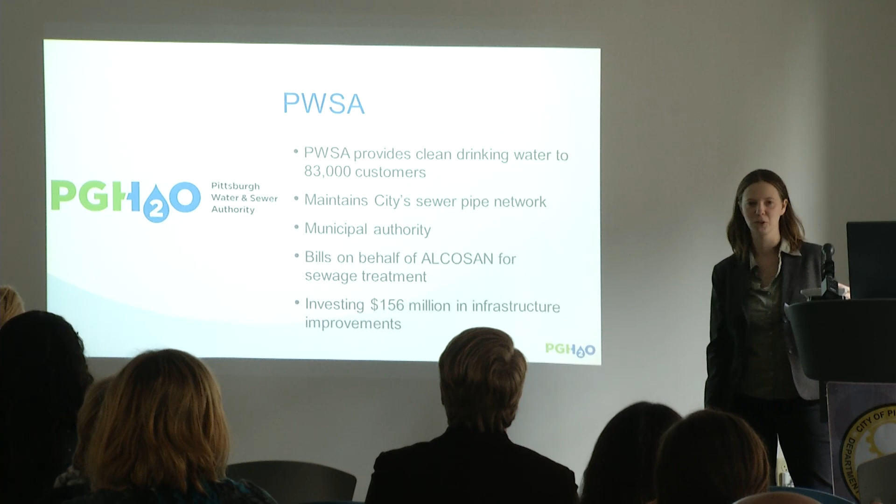On the PWSA water bills, you'll also see a sewage treatment charge, and that's coming from Alcosan. We're also invested in infrastructure improvement, which, along with many other cities, Pittsburgh needs.

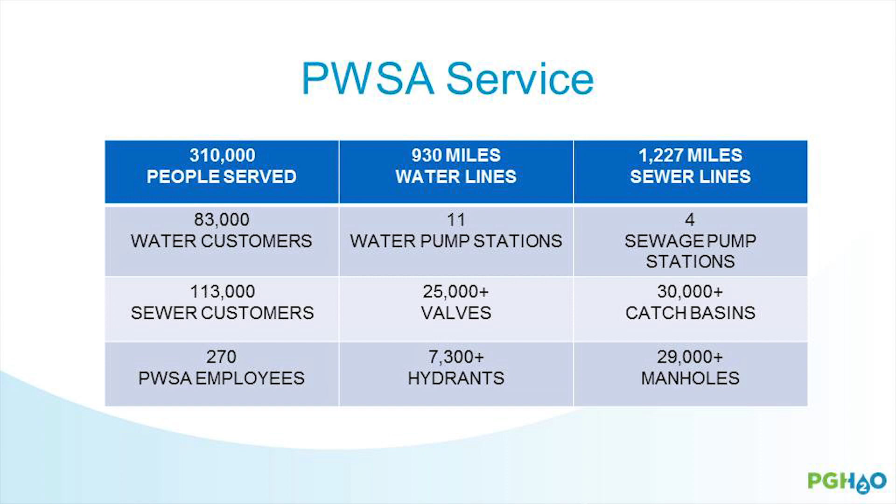So a few stats on our water production: 70 million gallons a day, with a capacity of 120 million gallons a day. A more significant storage capacity means that we're pretty well covered in case of emergencies. Lots of pump stations, a lot of catch basins, a lot of fire hydrants. It's a pretty big system, and it's an old system, and it requires a lot of maintenance.

So just to clarify, PWSA is not Alcosan. Sometimes people get confused, but the Allegheny County Sanitary Authority is the wastewater treatment plant in the region and serves 83 communities, including the city, and they discharge the treated sewage into the Ohio River. So there's a coming and going of water for drinking and returning of treated wastewater to the river all along, and that happens in many rivers. So PWSA is one of Alcosan's customers, and I'd be happy to answer more questions about that.

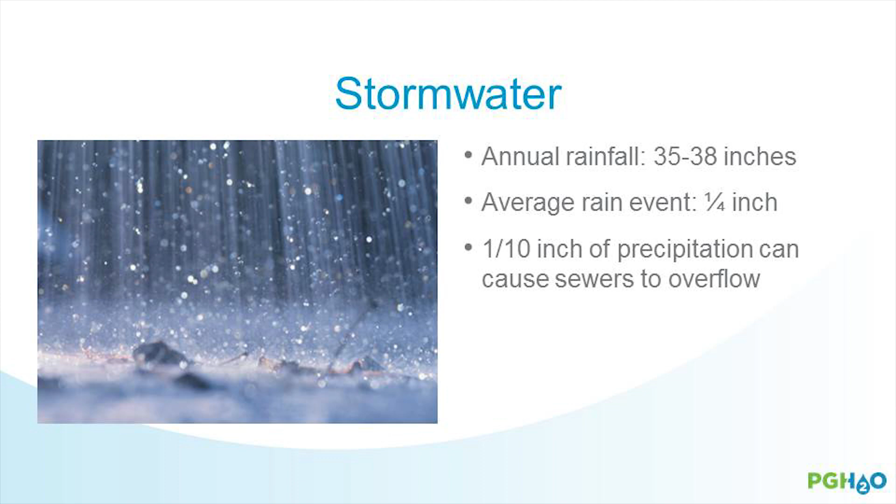But the next topic is basically why stormwater is an issue for PWSA, because generally PWSA has been known for dealing with things below ground. Once it enters the catch basin, once it's in the sewer pipe, then PWSA deals with it until it gets to Alcosan. But why are we talking so much about stormwater? We have a lot of rain in this region, and when we have rain, we have an overflow of the sewer system. We've got a diagram of that, I'll get to that in a second.

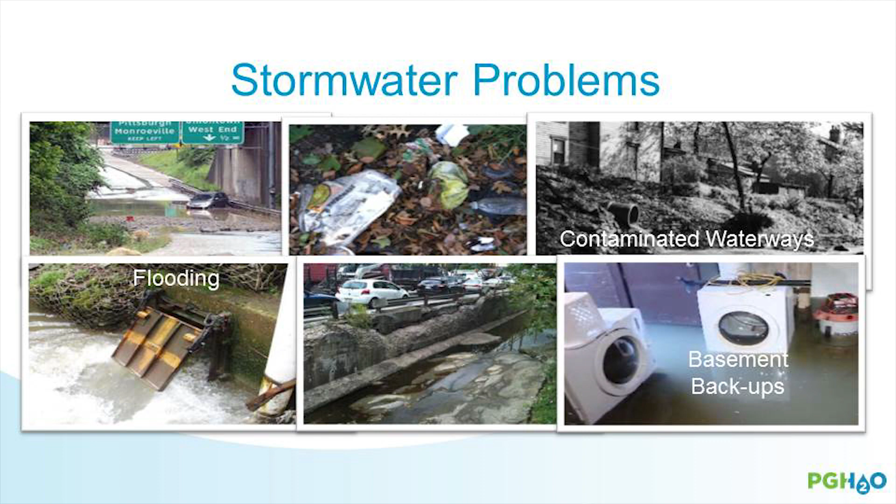Stormwater runoff is basically when we have a surface that's impervious, that's paved. The stormwater will have to go over it somehow to get to the catch basin, to get to the sewer system. This can cause some issues - this can cause flooding, this can cause contamination in our waterways, and occasionally we have basement backups.

But here's sort of the issue that we're most focused on: the sewer overflow. The way the system was designed is that sewage normally comes from residential and commercial properties, anywhere there's sewage, into the sewer system, and that's enough - there's enough capacity at the treatment plant to handle that volume in dry weather. But when it rains, the stormwater adds to that in those combined sewers, and they overflow.

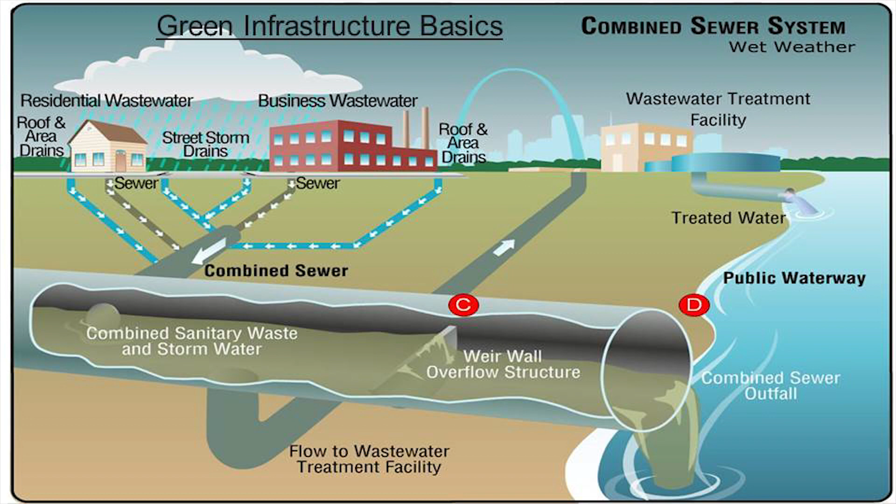And you can see this - these slides come from St. Louis, you can see the arch. So we're not the only city with this issue, they just happen to have a nice graphic depiction of it. But this is the issue that we've been trying to deal with for many years.

So why green infrastructure? Green infrastructure is the idea of mimicking nature by absorbing the rainwater, or at least managing it for a while until that storm has passed and there's more capacity in the system. So the idea is letting it soak into the ground, and you can have all kinds of technology to do that.

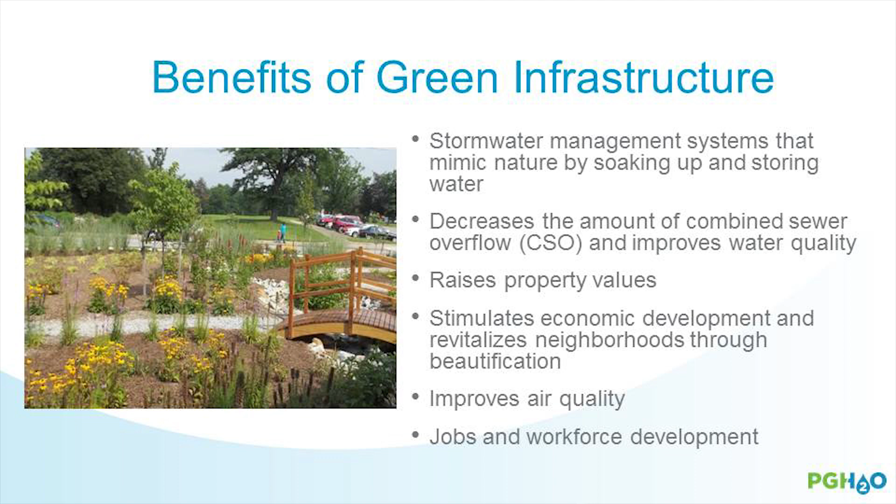But the benefits: you're using plants, you're using trees, and that's going to have other benefits like raising property values. It's going to beautify your neighborhood. Those trees and plants will improve air quality. There are jobs associated with installing and maintaining those green infrastructure project sites. And that's why we are talking about this.

That's why we want to do this wherever we can to manage stormwater, as opposed to building pipes and tunnels and that sort of thing, which we may also need to do in order to reach the water quality standards that we're trying to get to.

So these are just some examples. A rain garden is basically a depression in the ground, like a bowl. That allows water to stay there for a while, just long enough to infiltrate into the ground. Whereas if it's a slope and not a bowl, it's just going to run off into the sewer system. Even your lawn can be pretty compacted and not have that absorptive capacity.

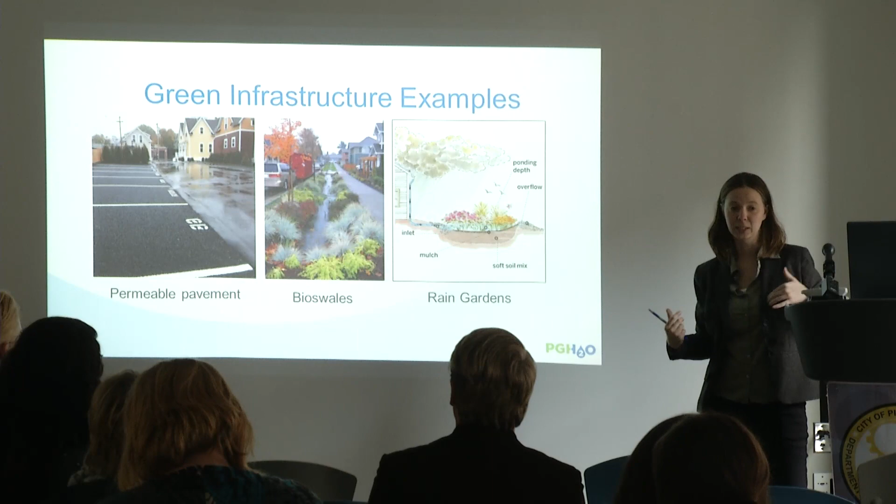Permeable pavement allows water to soak through. You can store it underneath until you can slowly trickle it back into the system or infiltrate into the ground. Street trees are a great resource. You can design a tree pit in such a way that it accommodates a lot more stormwater than a typical tree pit, so that's an opportunity.

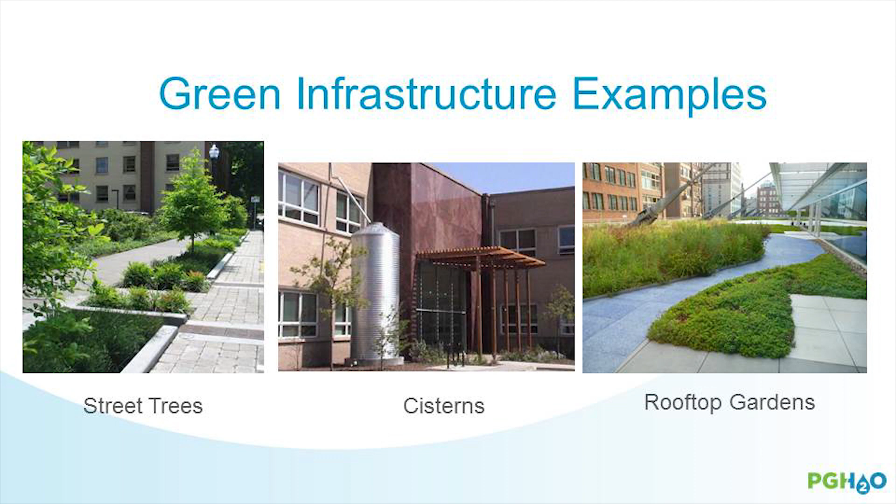Cisterns are just a way to capture rain. A rain barrel is a small version, a cistern is a big version, same concept, so you can reuse that water when it's dry again. A rooftop garden or green roof is another opportunity. Wetlands can be used to treat stormwater, and you can put trees in your backyard, or have a planter box. So you can get creative. These are opportunities to combine landscape and infrastructure, and there's a lot of ways of doing that.

So what's the reason why we started talking about this? The Department of Environmental Protection and the County Health Department required PWSA to deal with this issue, and the city. So PWSA and the city are joint parties to this consent order and agreement coming from these regulators. Not just Pittsburgh, but all the municipalities in the region had to address this issue.

We were required to submit a wet weather feasibility study, which we did in 2013. And while all the municipalities who were doing that had a gray plan, basically tunnels and storage tanks, we also saw at PWSA that there was an opportunity to test out green infrastructure and see how much stormwater it could manage and how much of an impact it could make on the issue.

So we worked that into our wet weather feasibility study as an adaptive management plan. We're going to try out green infrastructure, and we're going to see how much it can do. We're going to measure it. We're going to monitor it.

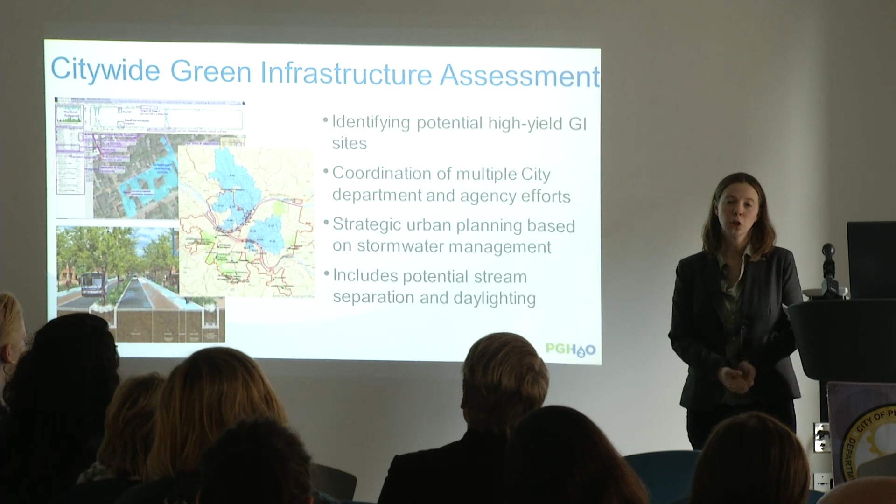So what are we doing now? We are now involved in a study that will tell us where in the city are the most cost-effective places to put green infrastructure. So we're using a lot of technology to do that. We're using modeling software that tells us where the raindrops fall, and we're also focusing on priority sewer sheds.

So we have focused on the ones that have the most sewer overflow, or also some of the smaller ones where we think we might be able to remove the need for a gray solution. We're also looking at stream daylighting, because sometimes streams end up in the sewer system and then we have to treat that water.

Why should we have to treat a stream like that? So we want to integrate that with urban planning.

Here's an example of what another city has done. This is Portland, Oregon - a stormwater management infrastructure site that happens to be an amenity for some of the nicest places to live in Portland. So this is the kind of strategy that we may be able to implement in the coming years.

Another thing we're doing is working with neighboring municipalities, because water droplets don't care whether you are in Pittsburgh or Dormont - that doesn't matter to them. So we've picked the Saw Mill Run watershed as our demonstration for an integrated watershed management strategy.

This is an EPA-approved way to address water quality standards. There are 12 municipalities in this watershed, and they each have regulations they have to meet to have clean water. So it makes sense for us all to work together and figure out what's cost effective for the whole watershed, because that's how the stormwater flows.

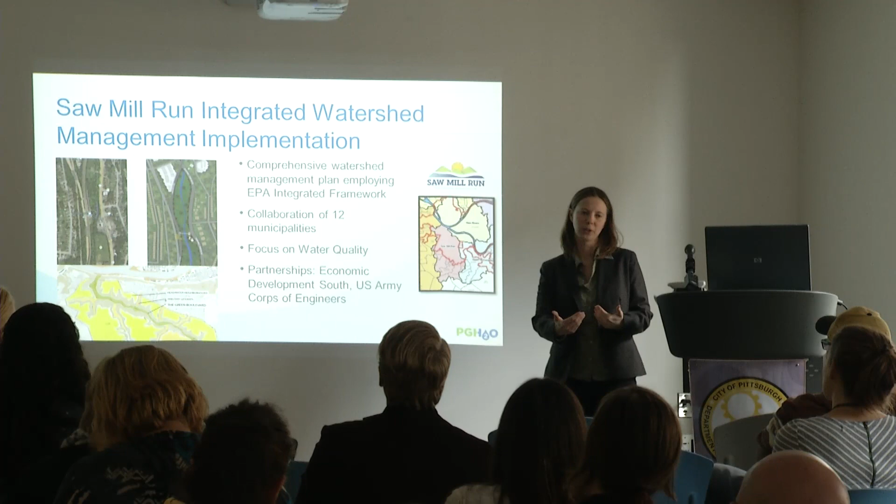So we partnered with Economic Development South. They're a community development organization in that part of the county. The Army Corps of Engineers has gotten involved, and we have a lot of momentum there. We're doing water quality sampling in the next month or so, which will give us data that tells us where to go next in that watershed. So that's an exciting project.

Another exciting project is a grant program we recently developed. We had $250,000, which we awarded to 17 projects throughout the city. Once implemented, these projects will manage somewhere between 3.5 and 4 million gallons of water per year. So we think that's a pretty good impact for our investment.

Those are mini grants that go to community groups and nonprofits, as well as matching grants going to property owners who are doing more large-scale, significant stormwater management. I'd be happy to answer more questions about that.

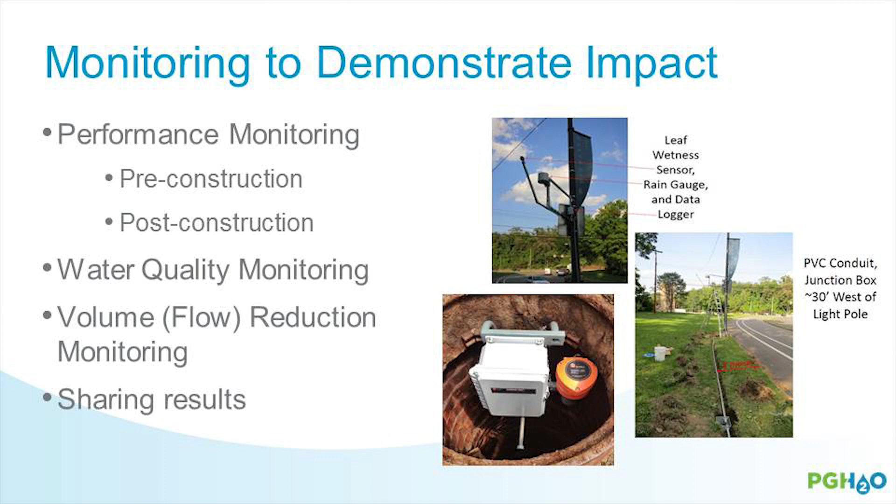As we're doing a lot of green infrastructure, we want to be measuring it and making sure it's having the impact we expect, so we can go back to the regulators and say, now that we know what impact it's going to have, we can use that to modify our plan for addressing sewer overflows and meeting water quality standards. So monitoring is a big component of everything we're doing.

Hi, I'm the communications manager for the PWSA, and I'm just going to pop in and interrupt for a minute to talk about this program.

This got kicked off at the end of March this year. As Katherine was discussing, we had this consent order and agreement, and one of the things we had to manage was some communities, particularly in the southern area of Pittsburgh, where approximately 4,000 are failing a dye test required by this consent order.

The dye test means if you're one of these homeowners who fails it, when you go to sell your house, you can't, unless you make this modification, which requires separating your stormwater and your sewage. This process can be extremely costly. The boundary between where PWSA takes responsibility and the homeowners is typically about the curb, so this is a homeowner responsibility.

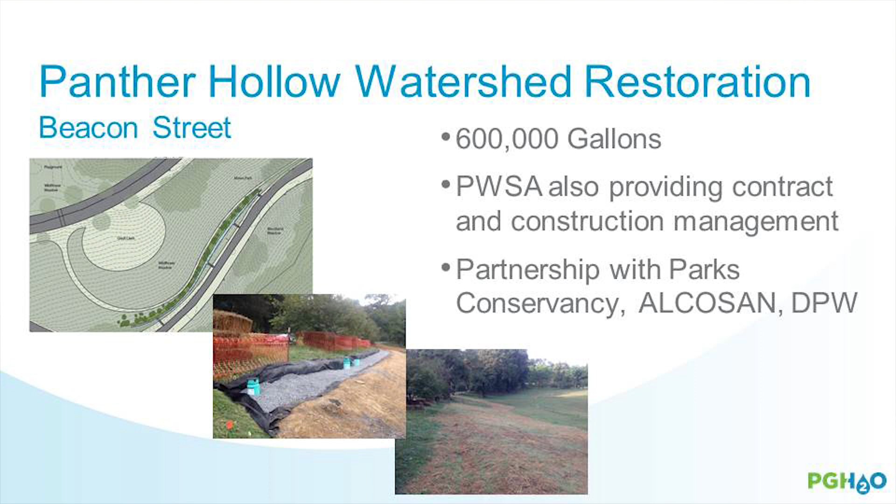A meadow with all its plants is going to absorb more stormwater than a lawn, slowing down that water as it comes down the hill. There are also devices called level spreaders that accept the water and spread it out along the hill so it absorbs more efficiently.

Another portion of that project is the golf course, where, as I mentioned, lawn can be pretty compacted, especially a golf course lawn. So putting berms or bumps in the landscape to slow that water down is what's happening here. This helps downstream where Carnegie Mellon was having flooding issues during rainstorms. The idea is to keep that water on the golf course where it falls.

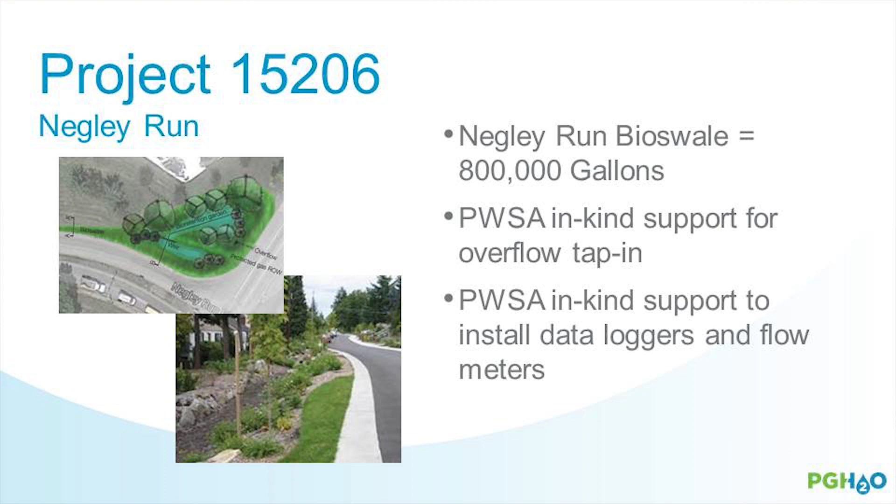In the 15206 zip code, Project 15206 did several projects. One is in Negley Run, where they have a rain garden at the corner of Negley Run Boulevard and Washington Boulevard. PWSA was involved in supporting that project and supporting monitoring there.

Another project that hasn't happened yet is in Larimer, where the idea is to do curb bump outs, or curb extensions, so that it's part of the streetscape and absorbs stormwater as well.

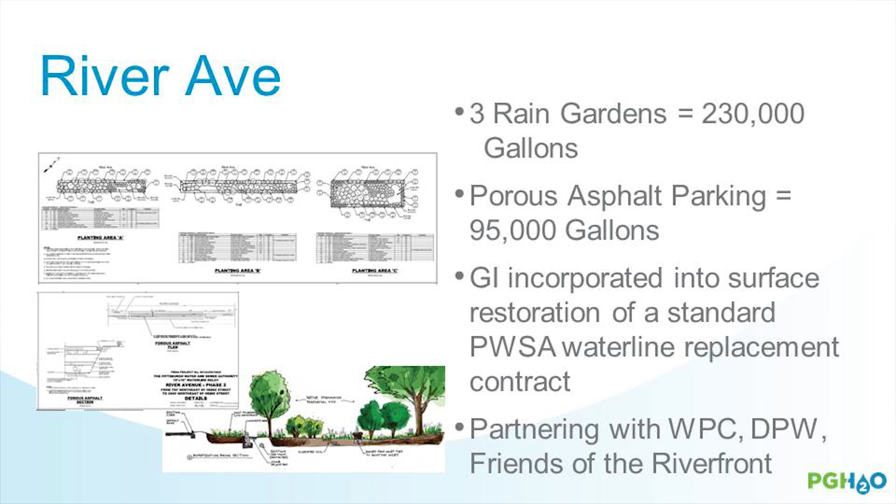On River Avenue, PWSA was doing a waterline project, and we took advantage of the fact that there would be a lot of space dug up and thought, let's put back some rain gardens, some bioswales, and a porous asphalt parking lot. We worked closely with Public Works on determining how to do that, and the Friends of the Riverfront agreed to help maintain the plants going into that.

At our treatment plant, we tried to demonstrate right in front of our building what this is like. We had a traffic island with a raised area in the center that just had one lonely tree. Our crews dug out the middle to make a big depression area like we were talking about.

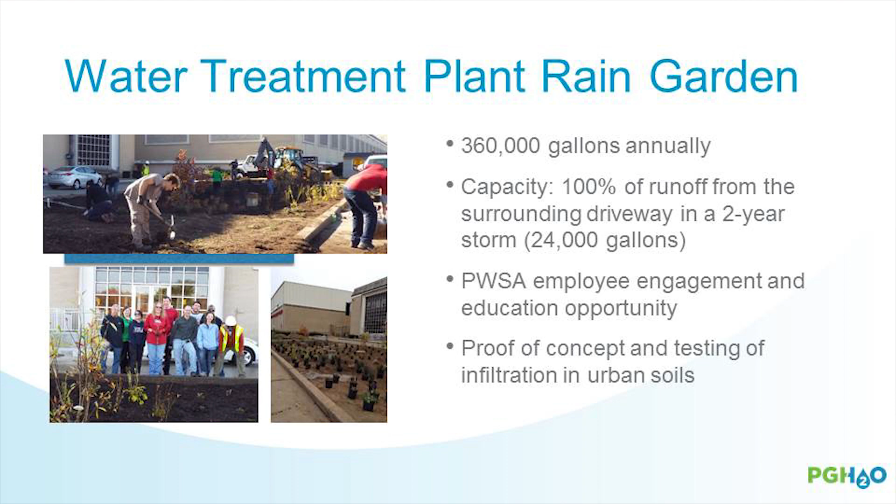We had our staff come out and do the planting. Everyone really enjoyed getting their fingers dirty—these are folks who normally sit at a computer screen. This is what it's looking like this month. Not only is it an improvement in terms of aesthetics, at least I think so, it's also going to manage the stormwater that falls along this entire long driveway up to this trench drain, coming down and all around where there are curb cuts entering in there.

So it's a really exciting project, I think. Basically, what we're talking about is using stormwater as an asset, rather than trying to send it away as quickly as possible down a pipe. As you know, we have a lot of wildlife on our rivers from time to time, so this is important. We want to make sure our rivers are usable every day and not polluted. So that's really what this is about.

So should I take questions now? Yeah, all right, we're taping, so if you guys have a question, make sure you speak into the mic if it will come off. Do you have a separate one? Oh, I see. Do we have any questions?

Just a quick question about the dye test: where do they put the dye, and what's the process of that?

So the dye test actually takes place in your home, and to do it you need to hire a plumber. There are tips on our website about how to identify someone who's a licensed plumber to do that process for you. Then the plumber gets a report, and we process the dye test. You're basically looking for it to go in your home and looking for the remnants of the dye outside.

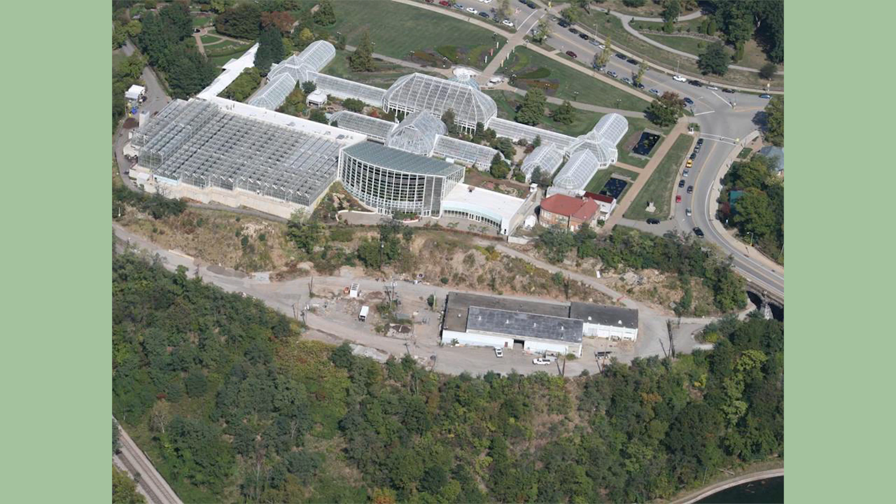So the Phase 3A was our project, the Center for Sustainable Landscapes. Really the idea of this project embraced the Living Building Challenge, which requires us to keep all of our sanitary waste, all of our sewage waste on site and treated, and also all of our stormwater. So none of the water from this lower 2.5 acre site reaches the pipe to PWSA and down the hill, down into the hollow and further on to Alcosan.

So the building was completed at the end of 2012. It's a 24,000 square foot two-story building. It's our administrative offices, our children's programming and education and research.

Some of the goals of the project, I mentioned the Living Building Challenge - we were awarded that in 2015, beginning of this year. We also achieved LEED, the Sites Initiative, which is kind of LEED for landscapes, also the Well Building Standard, and the facility is a net zero energy facility, so we generate more on site with renewables than the building uses. We've also been able to quantify the amount of stormwater that we've saved that hasn't impacted the city's infrastructure at 3 million gallons a year, based on taking that stormwater, getting it back into the ground, or reusing it in the building.

So when we started planning this project, we were looking at the nature of what nature did with stormwater before we started building on it or developing it.

Again, water that falls from the sky, some of it gets infiltrated, some gets used by the trees and plants, some settles in ponds and lagoons, and a lot of it evaporates, which we're seeing a lot on our campus in our lagoon over the hot couple weeks we had a few weeks back.

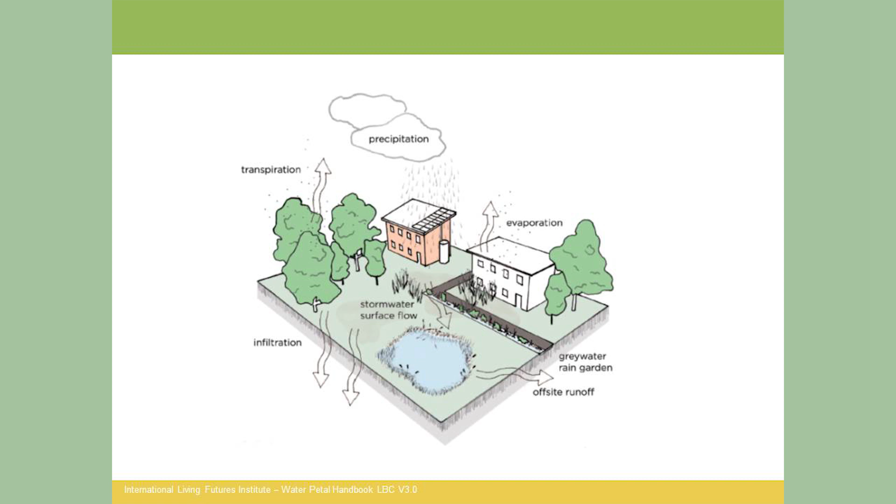So we're building on this land, and now water's running off of our roofs and we're trying to push it off. If we're in the city where there's not a lot of places to infiltrate, it connects to the city's infrastructure in certain areas where we can leverage the amount of pervious areas. We're trying to push that water and get it back into the ground, to achieve stormwater management, keeping the surge of storms out of the infrastructure so we don't have combined sewer overflows.

Some of the different elements that help feed the function of stormwater management on our project, which Katherine talked about earlier, is pervious paving. Over our parking spots, we have pervious asphalt. It's not really compacted very well, so there are still voids in it that let water find its way back into the ground. We typically have gravel underneath, allowing water to settle in and slowly perk into the surface. Around Pittsburgh, we have relatively clay soils, which are tough to perk through, so we're creating that space between the surface and the clay subbase to allow water to slowly perk into the ground.

Some of the other elements we're using are rain gardens. We talked about rain gardens, bioswales, and bioretention areas to allow that water to settle back into the ground.

An open water lagoon - we talked about stormwater as an asset. This is a huge asset for us in our new outdoor gardens. We have an open water stormwater lagoon that's created a nice amenity for our visitors and a real interpretation of stormwater, with fish and turtles and other things living in the gardens now from the stormwater lagoon.

Really the first place water falls onto the site, we can take water from the tropical forest roof, a big glass roof, and it comes through a pipe and fills up a cistern, a 1,700 gallon cistern, where the water is stored and we can use it for toilet flushing, irrigation, or service water for the sidewalks. If this tank overflows, it finds its way into the lagoon.

The lagoon is a wetland with wetland plants, and a lot of the water will be used by the plants. There's an underground perforated pipe in the soil medium of the plants, so the water is pushed there and bubbles up through the plants, and the plant's roots help to clean that water.

All the water that falls on the site perks back into the ground, or if there's a large rain event, it finds its way into the lagoon. If the lagoon overflows, it finds its way to a large chamber underground with gravel and what are called AquaBlox - big plastic units with voids in them - so the water can rush in, stay there, and slowly perk back into the ground.

We have a valve where we can tap into some of the unlined tank, and a lot of the water from surfaces like the roadways finds its way into the rain garden. If the rain garden overflows, it finds its way into that unlined chamber underground where we can tap into that water. We've also built another lined cistern that taps to the upper campus.

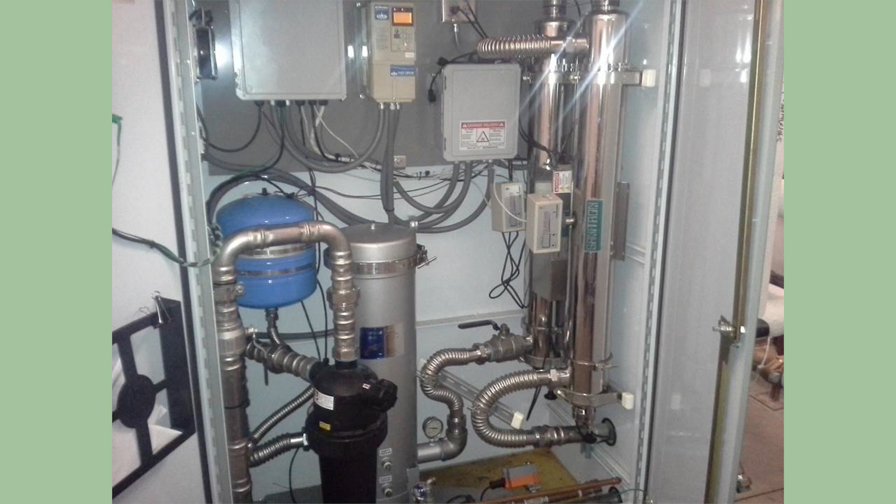So it's taking the stormwater, filtering it, and actually disinfecting it with UV lamps, and that's what you see here. We're treating it to a minimum level, some of the stormwater, based on the DEP standards for reuse water.

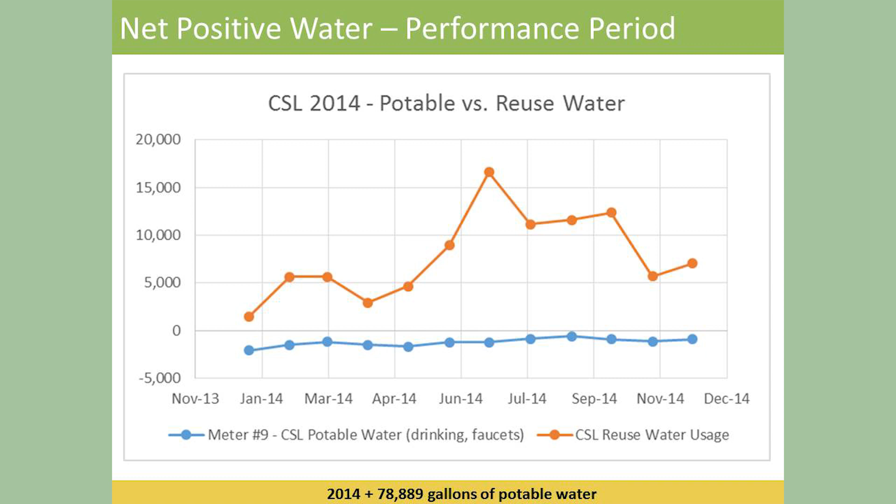So it's taking toilet water, running it through an on-site system. It's really interesting to see that - we have a relatively small building, but if you start to scale that up, 10% of the water is just for handwashing and drinking. The rest is just moving waste around. So it's interesting to think about that concept on a larger scale, what impact that could have or eliminate downstream into the infrastructure.

But again, we reuse about 80,000 gallons of what would be potable water, but it's reuse water. It's wastewater that we're using for the toilets, but that's specifically on the sanitary side.

Is there any water testing done, even though the cistern water is not used for drinking? But is there any basic testing though? Yep, we're required by our permit from the DEP to do quarterly testing.

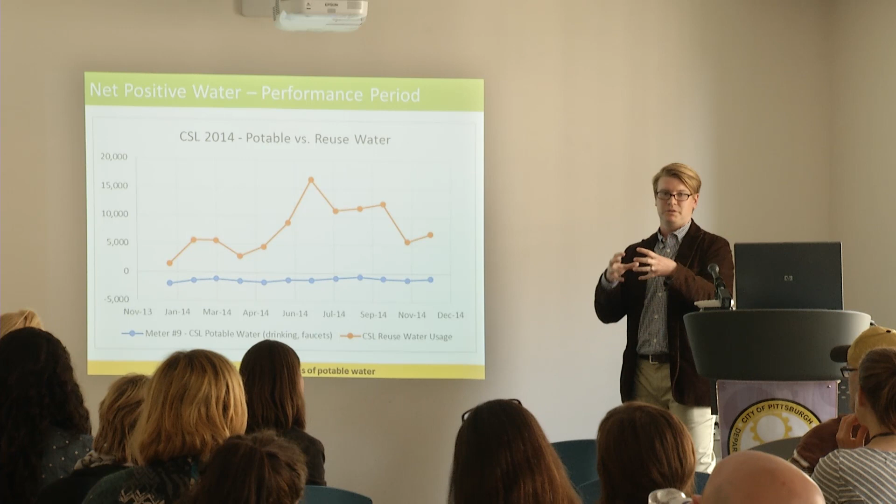So it's looking at things like fecal coliform, biological oxygen demand, the Class B standards for DEP. We do that on the stormwater, but also we're required to do it on the sanitary. We take raw sewage, treat it on site, and then put it back to the toilets. That's really where the testing comes into play for our sanitary system.

Just another thing to highlight, we talked about some of the green roofs, some of the different elements that we use. We have a green roof on the CSL, which not only helps hold back stormwater and get it back in the ground for use by the plants, but keeps the storm surge on the roof and not down into the city's infrastructure. We're monitoring this through performance, and I'll highlight those with a few graphs.

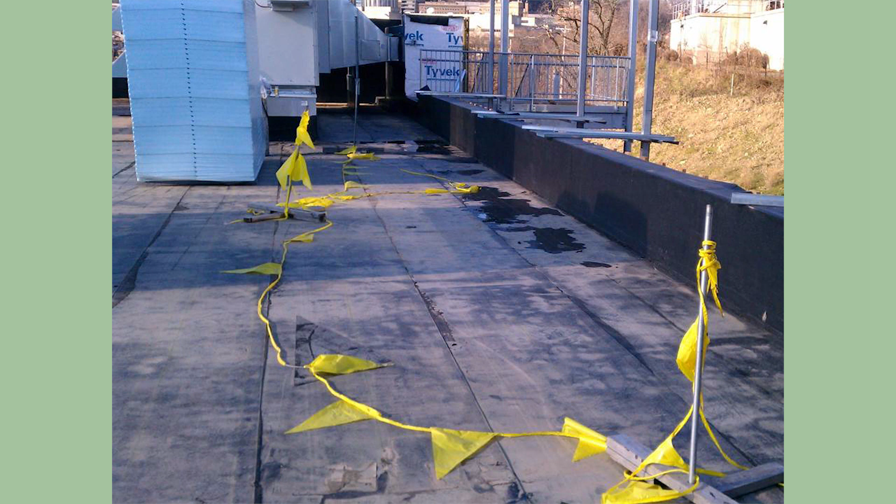So this is what the green roof looked like when it was being built - a waterproof membrane, you can see the insulation going up. This is the drainage board before we put the planting medium down. This is the guys putting the soil medium down, and then we planted the roof afterwards.

So a nice amenity - we talked about stormwater elements as being an amenity. This is part of the paid experience to go to Phipps, to check out some of the plants on the roof and experience some of the views on the lower portion of our campus. And this is what it looked like earlier this summer - kind of blends in with the landscape.

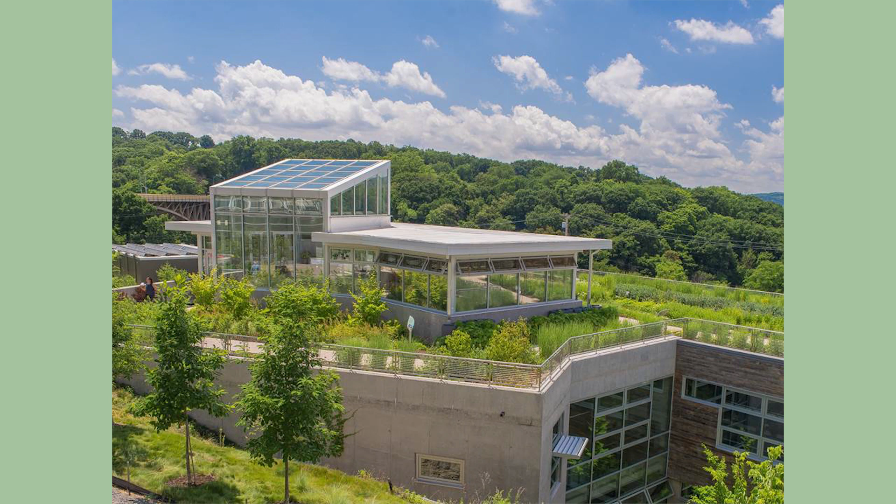And we've had a lot of - before this cold snap, we had a really long dry spell, right? Not a lot of rain. The level of the lagoon - it was very warm, a lot of evapotranspiration, and the water was kind of burning off, so the lagoon settled down and the fountain turned off. A lot of people are asking why is the fountain off - because we haven't had a lot of rain, and this is a stormwater lagoon.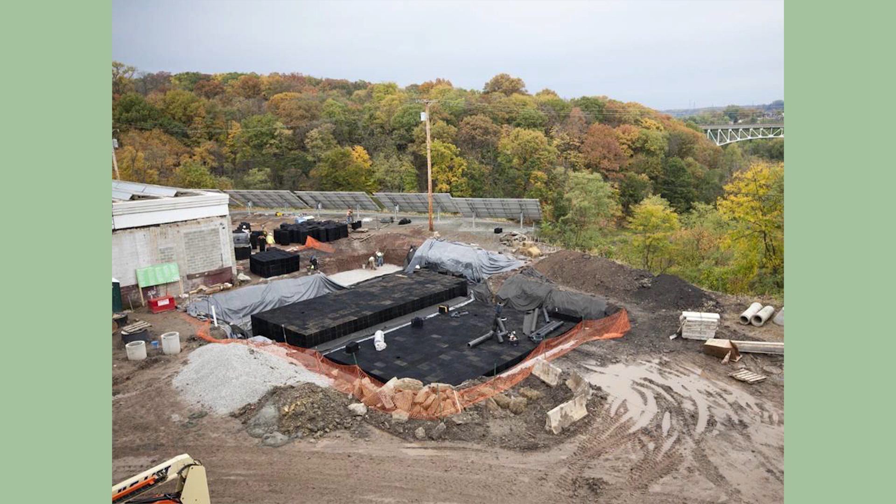This will give you a little more of an idea of scale. There's a couple people standing here working, installing those blocks. Again, half of this is unlined and half is lined. This is the lined portion that's tied to our upper campus, and this is the unlined portion that allows the water to perk back into the ground.

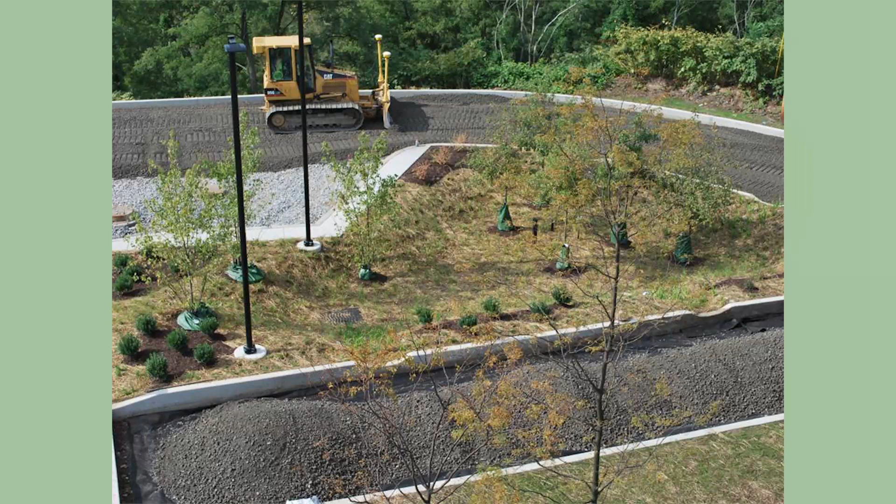This is just another side of it, I was up on the roof taking a picture, and this is down on the ground. This is one of the rain gardens. We talked about the depressions, and also where the inlet is—you can see it's kind of up high in elevation, with the curb cuts. So when it rains, the water actually goes in, similar to PWSA's project in front of their office. This is scaled up with two rain gardens here, and then this rain garden sits over top of that unlined chamber underground, so it allows the water to perk in.

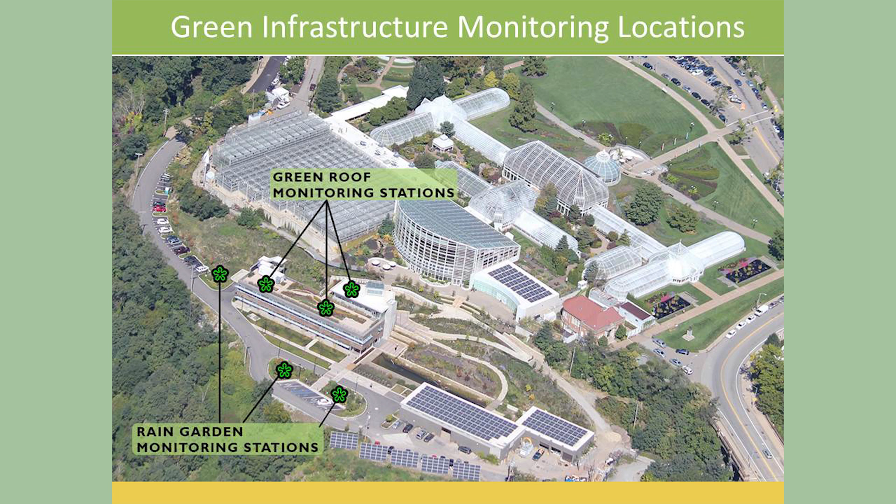Now I'm going to highlight a little bit about some of the monitoring that we're doing of these different elements—specifically the green roof monitoring stations and the rain garden monitoring stations, to understand the performance of these elements and the mechanisms of where water is moving around in the soil and how they're working.

This is the green roof, which we're actually monitoring. The devices sit here. What we're doing is we have a rain gauge so we can see when it's raining, and we can understand how the system is interacting over time with the green roof. So we have a weather station, we understand when it's raining, and we also use different sensors with moisture content readings that go in different layers of the green roof, so we can see how quickly water is moving through, how much water, and what the quality of the water is at certain levels.

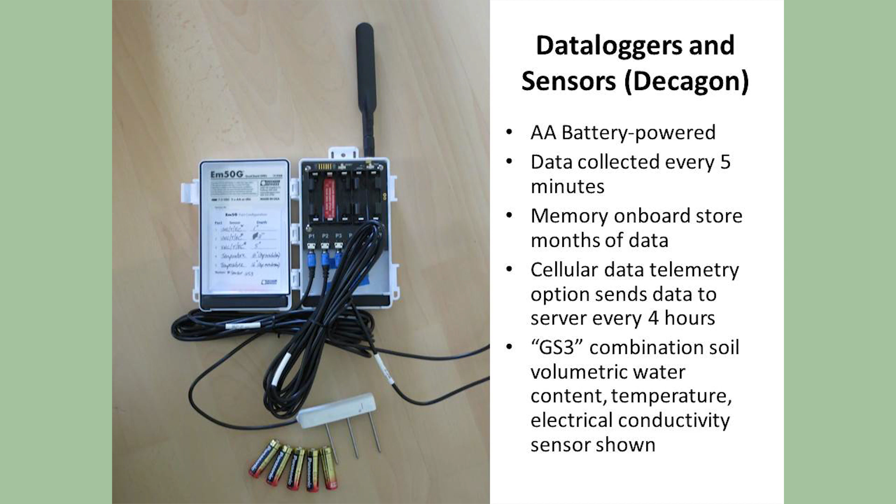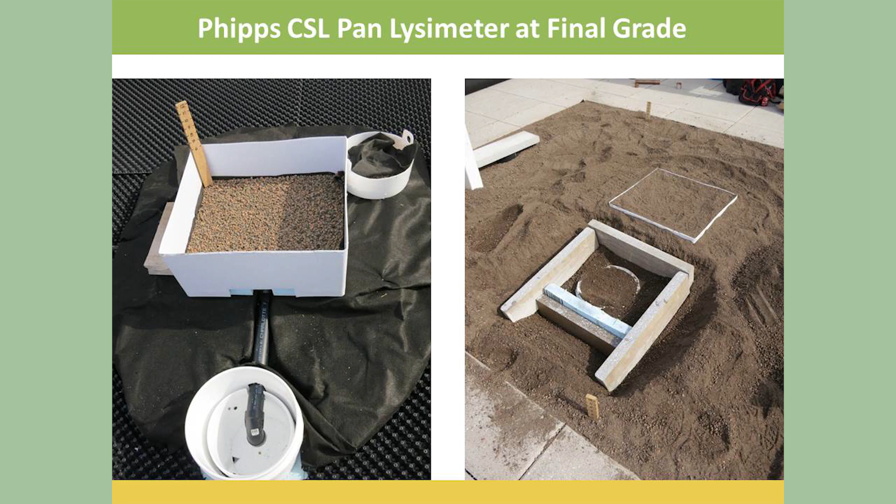Also, we have a lysimeter—this is a mock-up of a 2x2 square foot section of the green roof. We're building up in this little box the same profile as a green roof, so water can perk through. Once it hits the bottom of this tank, it comes out of a pipe and spins another rain gauge, so we can see when water has gone all the way through the green roof system. I'll highlight that on some of these graphs later. This is after we buried the lysimeter.

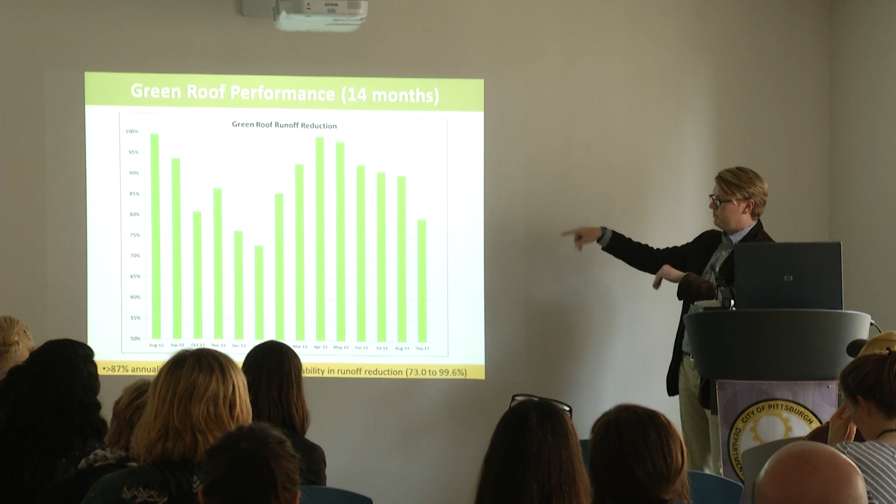What we've been able to do is show the amount of runoff reduction from the green roof. When it rains, a lot of the water is held onto the green roof and used by the plants, or it's evapotranspirated quickly. So it's holding back water from the storm surges that hit our combined sewers, while also being used for the plants. We've shown an 87% annualized reduction over this time period—it's holding back a lot of that water. On the CSL project, we have goals of no water touching the city's infrastructure, so when this overflows, it just finds its way into the lagoon, building those different elements along the way.

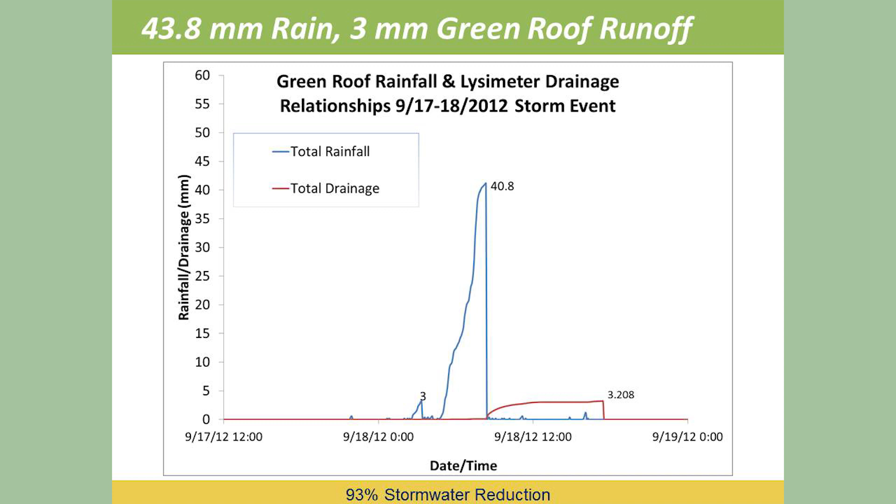So we focus in on a typical storm event. It's raining, it stopped, and then we can sense the amount of water going through the green roof system and when this bucket is being tipped. So that's how we come up with the reduction per storm event.

And even during Hurricane Sandy, we showed the amount of reduction, 76% stormwater reduction during this storm event. So it's pretty interesting to build this data and showcase it to policymakers and people making big decisions about infrastructure on projects around the city. We're excited to be a project that's being monitored.

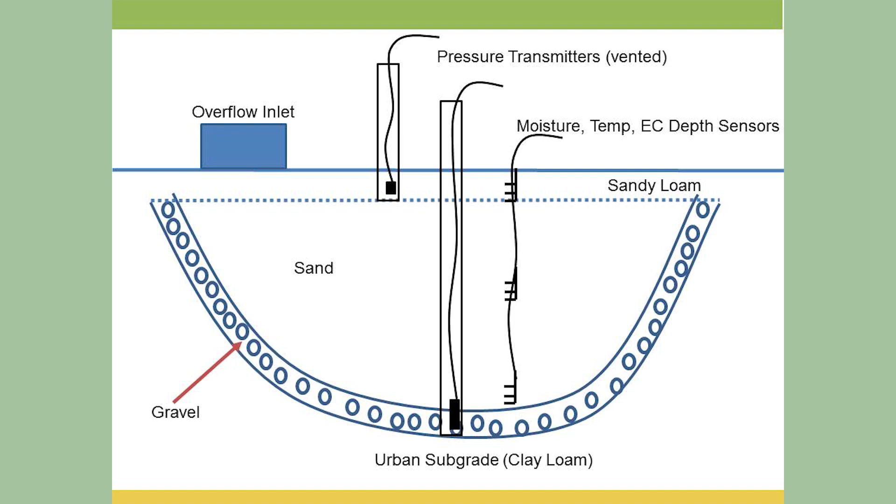And again, we have level sensors and moisture sensors in different areas of the rain garden. This is John Buck, a green infrastructure champion I like to call him, setting up some of the monitoring from Civil and Environmental Consultants. We actually installed this stuff after the green roof was put together. You can see some of the different sensors going in, and it all ties to a cellular readout that downloads the data periodically.

So these are some of the outputs from the monitoring. It really shows how fast it took water to come through the rain garden, 10 inches per hour in the sandy layer, and then down lower in the clay layer it took a lot longer to get that water back into the soil than it did in the sandy soil.

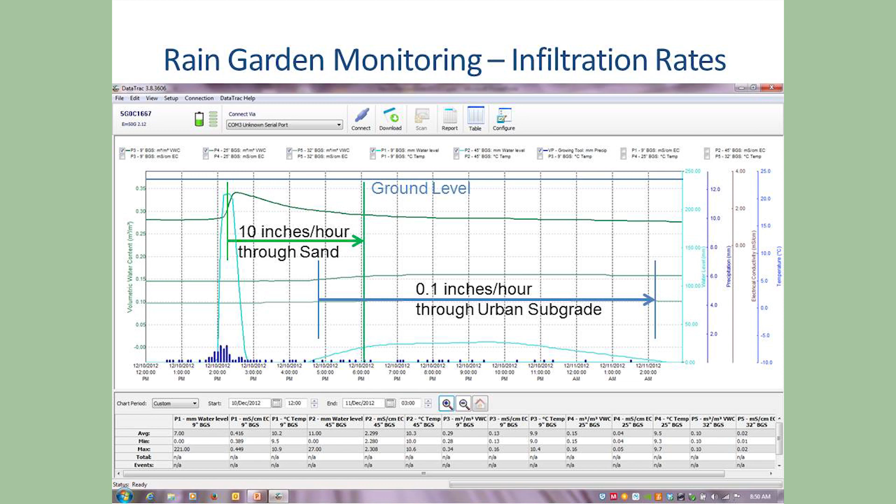And what we're starting to see, depending on the design of the rain garden, there are multiple factors in how well it's performing, how much stormwater it handles. We're trying to understand what types of head pressures exist between those depths to allow this to perk quicker. You want it as big as you can get it, but you probably can't dig down 10 feet. So there's a happy medium in what types of soils are used and how big that gravel layer is. We're really honing in on that.

Another thing for us is we want to capture rainwater for use on the upper campus for irrigation, but we're trying to capture water coming off of pavement. In the wintertime we're de-icing, we've got to get rid of the ice and make sure everybody's safe, but that does impact some of the groundwater we're trying to capture, so we're monitoring those levels. If we are irrigating in the winter in the future and trying to capture this water, when's the best time to capture it? When can we use it? When can't we?

So in conclusion, for the Center for Sustainable Landscapes, we were able to show that there was no sanitary or stormwater that got into the city's infrastructure. That was the goal of the project. But also this data helps prove that even in our clay soil conditions, infiltrating is an option depending on the type of design of the green infrastructure.

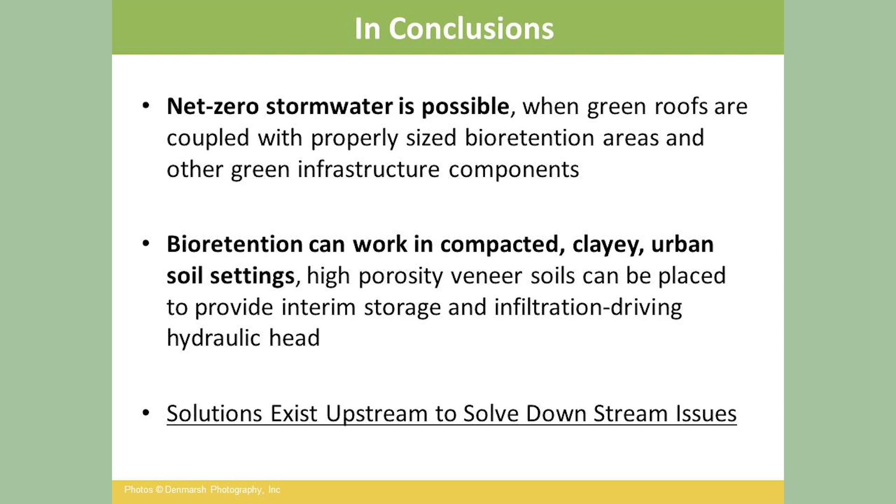So we're really advocates for solutions to a lot of the combined sewer overflows. We feel those can be handled upstream, at the localized level, whether residential or on a commercial scale. Again, the conservatory, we lease from the city. We see ourselves as stewards of this place, and we want to build in a lot of these redundant, resilient systems.

So down the road, we can rely a lot on the rain that falls on our campus to capture and reuse it. This place has been here for 100 years, and we're trying to invest in systems so it will be here for the next generation.

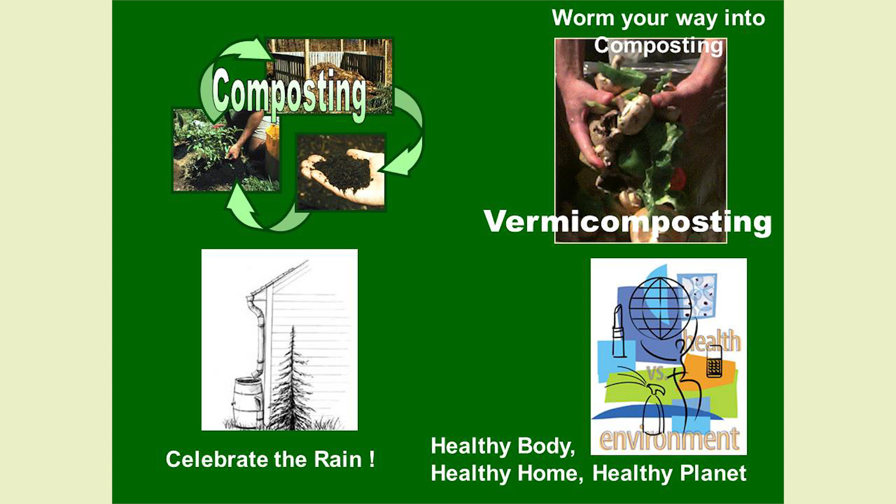So we've talked a lot today about quantity, but quality is a big issue too with stormwater. All of the different toxins, human waste, endocrine disruptors, lots of different things, pet waste going down the drain, and ultimately these are part of the combined sewer overflow issue.

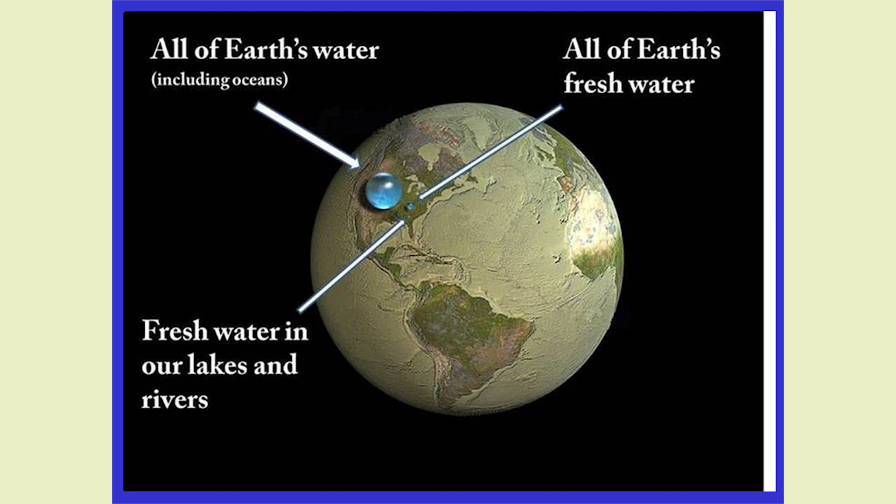In this photo, we see all of the Earth's fresh water, and this little tiny dot is water in lakes and rivers. So we're extremely fortunate in this area to have a lot of water and rivers.

Not the case elsewhere. Oftentimes we talk about watersheds, but there are always some people who are like, just what exactly is a watershed? So a watershed is an area of land that all drains into the same body of water. Watersheds are nested—little ones inside bigger ones, inside bigger ones.

I live in the Lip Run watershed. That means all of the water from my yard drains down into a little tiny creek called Lip Run—that's the collection site for my area of land, my watershed. But Lip Run drains into Girty's Run, so I also live in the Girty's Run watershed, which drains into the Allegheny River. I also live in the Allegheny River watershed, etc., etc.

So an area of land that all drains into the same body of water—what's important about that is the way that we live on the land affects the quality of water in our rivers and streams, even if we don't live right on a river or stream.

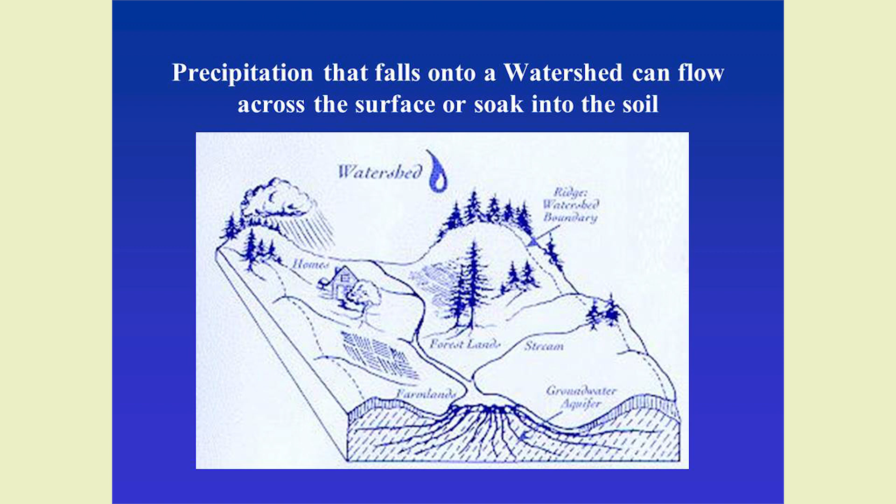Watersheds are bowls, the collection sites down in the bottom of the bowl, like you can see right here, with the top of the hills separating one watershed from the next. Watersheds are separated from one another by elevation, so all of the water that falls between the tops of these hills drains down into the bottom of the bowl, and there you have a watershed. Everything water passes over, it wants to pick it up and carry it along, dumping it right into our waterways.

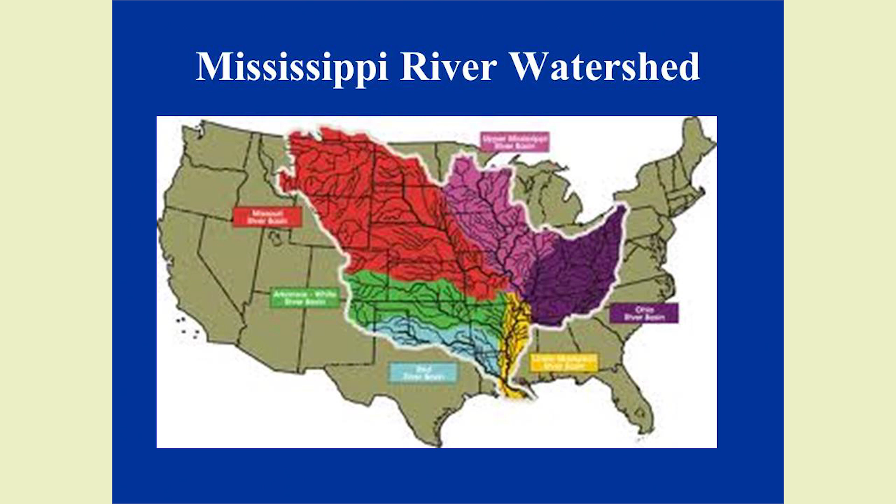So some of the big watersheds in this area are the Allegheny River watershed and the Monongahela River watershed. There's Pittsburgh up at the top, unusual because that river flows north, and then they form the Ohio. This purple area is the Ohio River watershed—there you have the Ohio River, the blue thing in the bottom of the bowl, with all of that land draining into it, which is inside the Mississippi River watershed, draining a little over half of the United States, even extending into a bit of Canada and Idaho, and then, of course, the Gulf of Mexico watershed. So those are the watersheds that we in this region are in.

Human impact on the watershed is what we're here to talk about today. We have two main types of water pollution. I'm going to talk fast because I have a lot of pictures and a lot of information in a little bit of time to share it. But anyhow, two types of water pollution: point source and non-point source pollution.

This is point source. CSOs, combined sewer overflow, is point source pollution, one of the reasons why we're in violation of the Clean Water Act and are mandated to get our sewage out of the rivers. Basically it means you can point to the source, it's easy to identify. It's not as big a problem as it once was because of the passage of the Clean Water Act in 1972. We don't have, hopefully, factories just dumping pollution straight into the river.

The biggest water pollution problem facing North America today is the opposite: non-point source pollution. That means it's coming from all over the place, and it's hard to identify a single source. It's coming from homes, schools, yards, businesses, mining, you name it. It's a little from here, a little from there, but it adds up to a big mess once it hits our rivers and streams. So now about our own residential sites.

What I like to see is on-site absorption. Any rain that falls or snow that melts on our yards, if we have the space, should be absorbed on site. We don't want to see it going across impervious pavement, and of course rooftops are impervious as well. It becomes polluted runoff and then pollutes our rivers and streams. What we're striving for is on-site absorption, having the water that falls on our property be absorbed on-site.

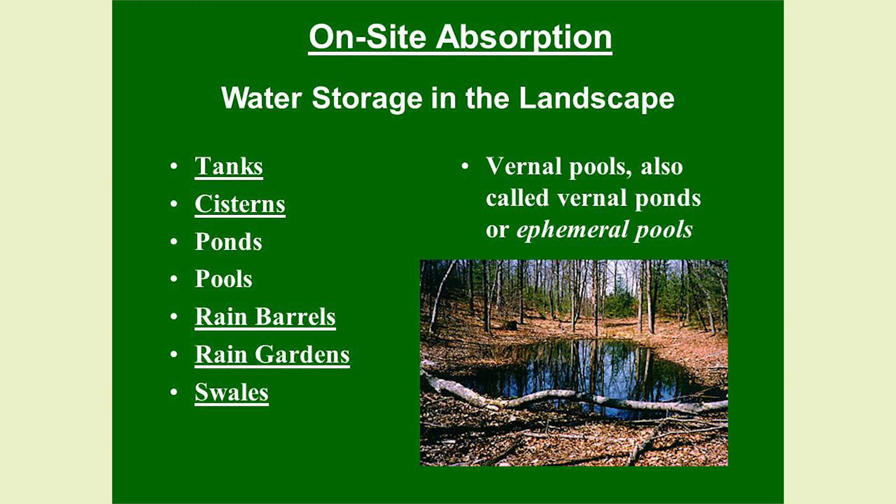There are a number of ways to capture that water and have it be absorbed on-site, instead of too much water going to Alcosan and causing CSOs. In our landscape, water can be stored in tanks and cisterns, ponds, pools, rain barrels, rain gardens, swales, and vernal pools. A lot of these things we've already talked about a little bit today.

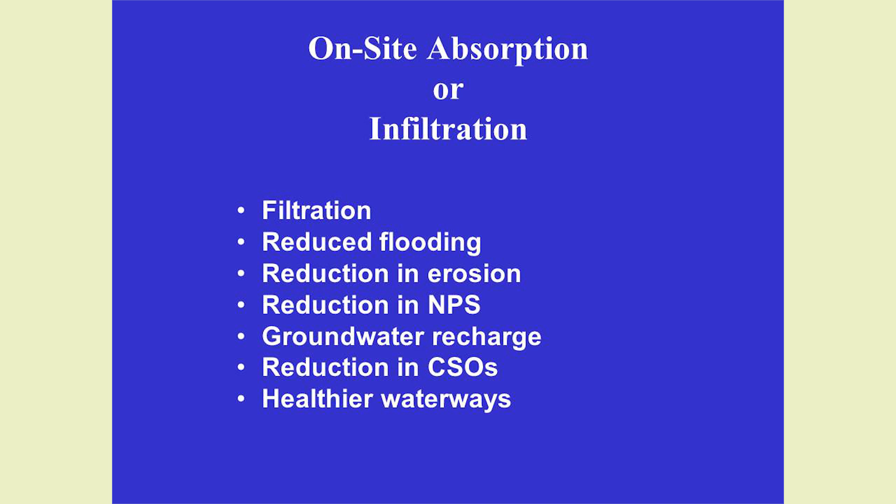On-site absorption, infiltration, or percolation is awesome because with filtration we have reduced flooding, a reduction in erosion, a reduction in non-point source pollution, increased groundwater recharge, a reduction in combined sewer overflow, and simply healthier waterways.

But improperly managed stormwater causes flooding, water quality degradation, stream channel erosion, reduced groundwater recharge, loss of aquatic species, and combined sewer overflow.

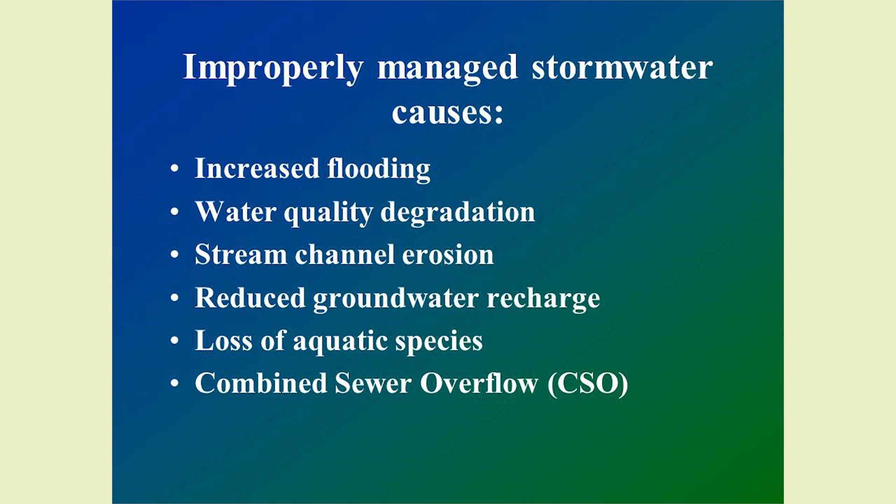We also talked about how much of this is actually happening in this area. Every year in southwestern Pennsylvania, enough raw sewage is released into our groundwater to fill Heinz Field about 100 times. And we also mentioned earlier that it only takes one-tenth of an inch of rain in the rainy season to cause combined sewer overflow in our areas.

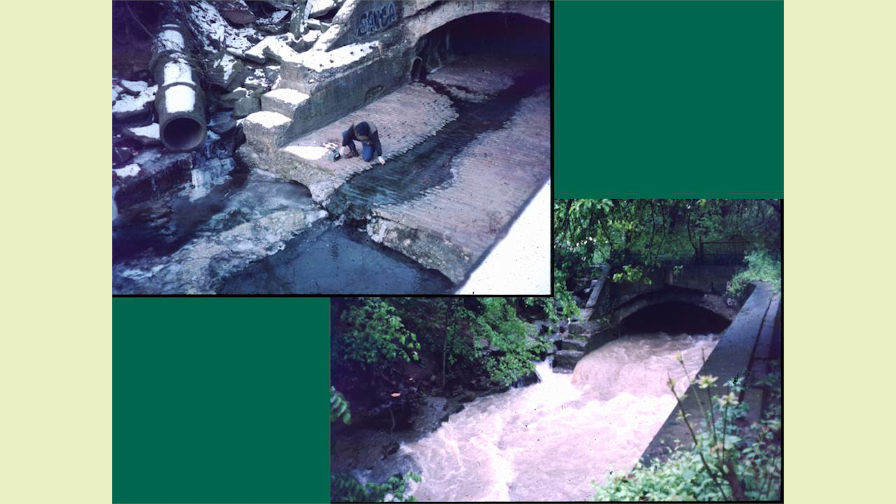This is simply a picture of impervious surface carrying lots of pollutants. This is a picture of Nine Mile Run before the Army Corps of Engineers came in and did the remediation work. In the upper left, on a dry day, you have very little water in the stream because there's so much impervious surface that there's just very little groundwater. But about 10 minutes after it starts to rain, it would look like the bottom right — it sounds like a freight train coming through that pipe, and the water just comes bursting out, causing all of those related problems.

Filter strips, vegetation strips, swales, bioswales — lots of different names for these — are one solution. In parking lots, instead of directing all of that water into a storm drain to go out to a river or to Alcosan, it's simply directed into a vegetated area where it goes into the ground and works its way slowly and gently out to the nearest body of water.

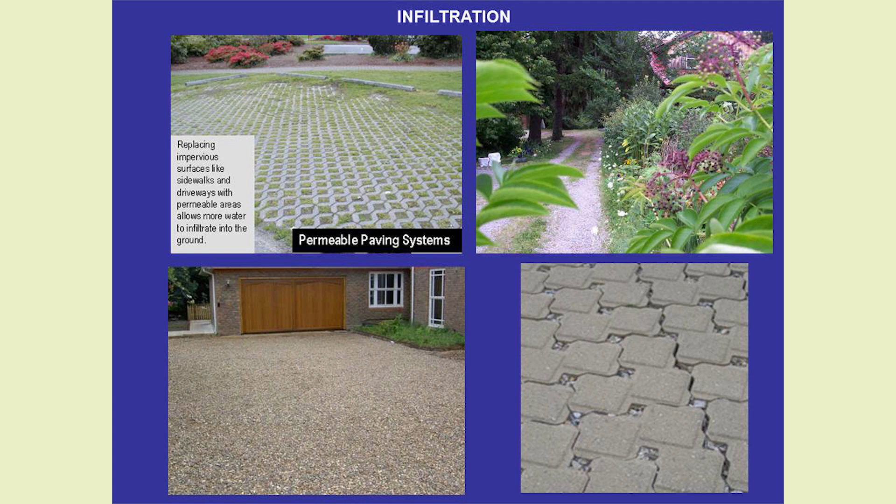And these are some ways we can do that even in our yard with our driveway, for example. These are just some different examples of permeable pavement, anything from something very fancy to my home, just a gravel driveway, an old school style gravel driveway, and more impervious pavement, just picking up lots of different types of pollutants.

So in our own lives, in our own residences, these are some of the aspects of our lives where we have a direct impact on water quality: lawn and garden care, pet care, car care, whether we recycle or not, litter, farming and the type of farming we support by the types of foods that we buy, the use and disposal of pharmaceuticals, and definitely the use and disposal of household chemicals and personal care products.

So at PRC, we advocate going green and clean, using green cleaning supplies, green personal care supplies. A lot of these are very easy to make. We do workshops on these, so I'm just mentioning these things. If you want to know more, I've got information over there about our other workshops. But anyhow, you can make them, or you can buy them ready-made.

Antibacterials are a big problem in our waterways. They contain a pesticide. Scientists are telling us there's no reason to use these. Regular old-fashioned Castile soap works just as well, it's just as effective at killing germs. But these antibacterials can foster the growth of bacterial resistance, and they're very harmful to aquatic creatures. No reason to use them. In fact, in Minnesota, they're banned.

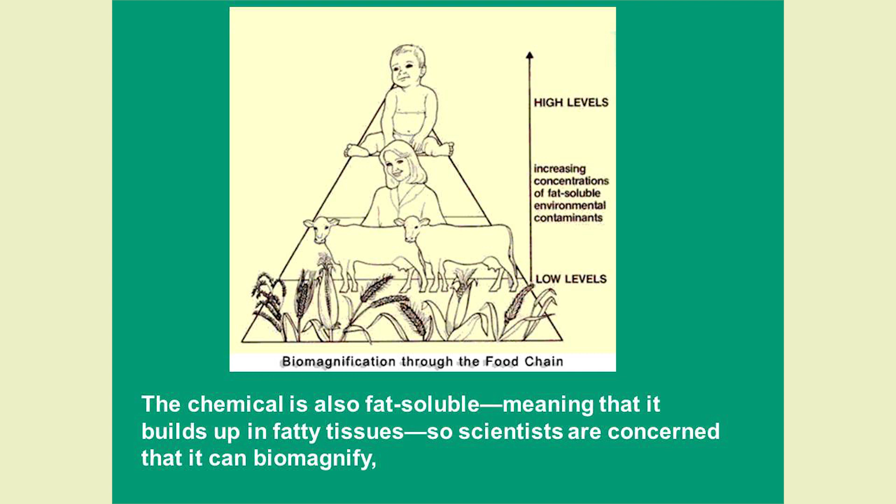They're fat-soluble, meaning they build up in our fatty tissues, so they biomagnify. Just to quickly mention, they're now finding lots of synthetic fibers in fish in the oceans, and they're attributing that to washing clothes made out of synthetic fibers. This is kind of fairly new information, microplastic pollution.

Lawn and garden care - obviously, what you put on your lawn is going to wash off, go down the drain. It ends up in our rivers and streams, so chemical fertilizers and pesticides. They say that the average American lawn uses up to 10 times more chemical pesticides per acre than farmers use on crops. So we want to try to stay away from the chemical fertilizers and pesticides because whatever you put on your lawn eventually hits our waterways.

Lots of reasons not to use pesticides. They're harmful to children, they're harmful to fetuses and infants. According to the EPA, 300 million pounds of cancer-causing pesticides are used in the U.S. per year, and there are special problems for pets - they're running around in the grass, lying on the lawn. Farmers, of course, and farm workers, and children who are outside playing and breathing more heavily, more breaths per minute than adults.

This is just one pesticide, atrazine, that's been studied for at least 30 years now. It's an endocrine disruptor. Lots of things are endocrine disruptors, and they're pretty awful. They get into the waterways and affect aquatic species. There's been a study done across the United States on atrazine.

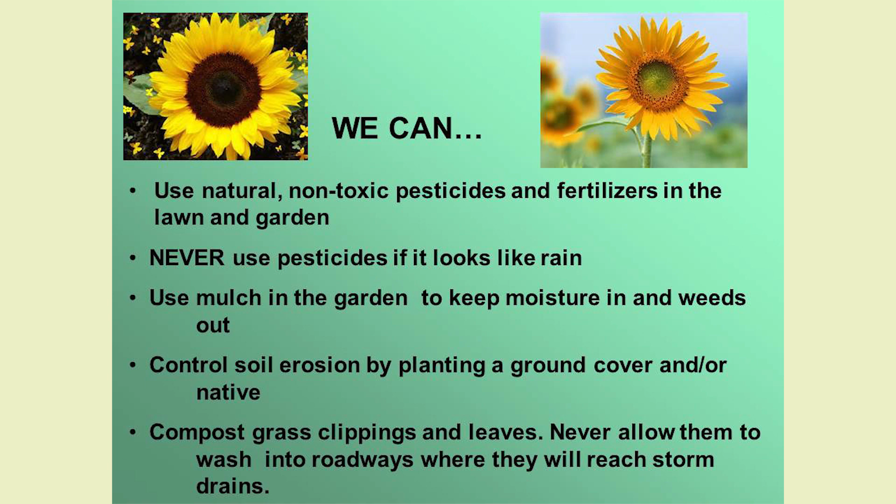You should never use a pesticide if it looks like rain because then they're washing off full strength. We recommend using mulch in a garden to keep the moisture in and the weeds out, controlling erosion by planting a cover crop, native plants, of course, always, and composting grass clippings and leaves. We never want to hose those down the street or the sidewalk where they go into the storm system, into our waterways, and that creates another whole set of problems. This is just one natural herbicide, corn gluten meal.

It's a pre-emergent. You use it early in the spring, but it works quite well. It's available at almost all lawn and garden centers nowadays. Just remember, when you're fertilizing the lawn, you're not just fertilizing the lawn, you're fertilizing the river as well.

This is a great organization, pesticide.org. They've got solutions to all of your pest problems, anything from the tiniest little gnat to full-blown voles, moles, raccoons. You can visit their website if you do want to look for a safe pesticide for some reason.

Okay, so farming and the types of food that we support. If we're supporting factory farming, then we're supporting the use of a lot of chemical fertilizers and pesticides. There's a lot of manure going into the water from these places. The animals, there are so many shoved into a small area that they're typically on lots of medications and antibiotics. All of that's in their manure and washing into the waterways as well. So we like to support our local farmers and also organic farming.

Car care is a big one as well. Let's take a look at some of that. We want to make sure we clean up our brake fluid, our oil, our grease, and our antifreeze immediately. We don't want to hose that away. We want to clean it up with something absorbent. We want to pull our car onto a grass or gravelly area so that the water has a chance to infiltrate and get filtered as it's working its way to the nearest waterway, instead of just down the street into the storm drain.

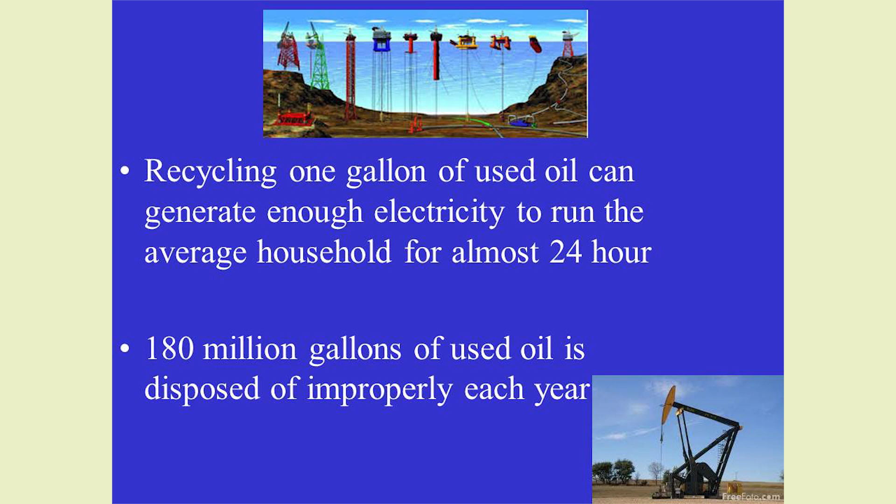Recycling a gallon of oil saves lots of energy, but an awful lot of it is disposed of improperly, causing pollution. We want to take our batteries and our oil filters in for recycling as well. Basically, keep your eye on your car, monitor it. If you're dripping oil and gas, we need to deal with that. And remember, when you're washing your car in the driveway, you're not just washing your car in the driveway.

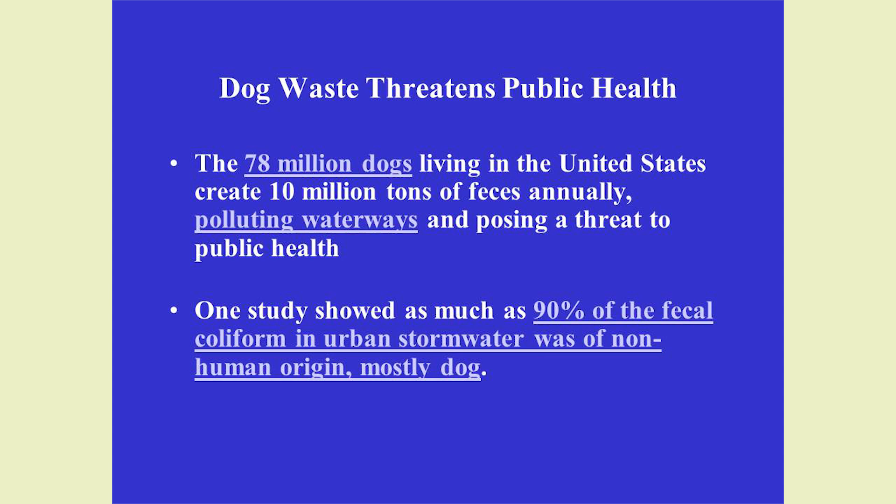Other things to take into consideration are our solid waste reduction. We can compost, and compost is also great for the environment and reduces water pollution, because it's reducing the amount of material we're sending to our landfills, as does recycling. If everyone were to recycle everything that one can recycle and compost everything that one can compost, we could reduce the amount of material we're sending to our landfills by 75%. The size of a typical landfill is 100 to 200 football fields.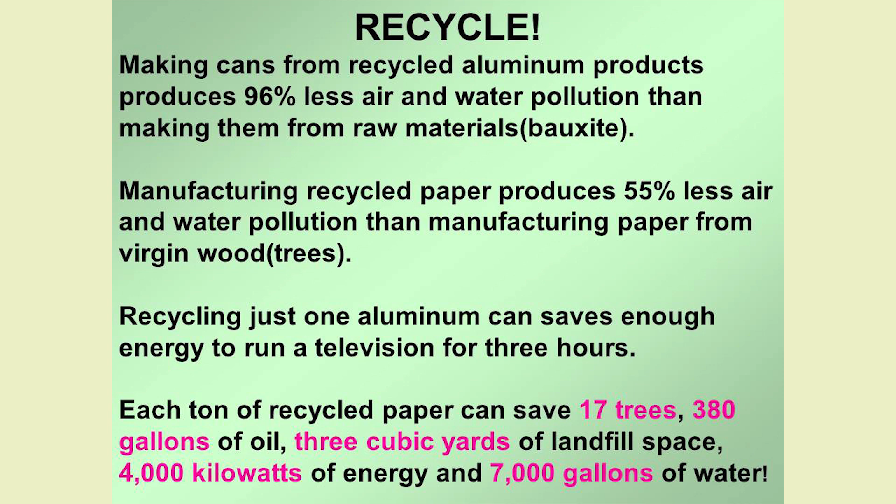I visited one in Monroeville. It's the size of about 400 football fields, so they're quite large. Leachate is the toxic liquid that forms in the bottom of them. There are precautions taken, but we don't know how long these rubber liners, about this thick, are really going to last. So we want to try to keep as much waste as possible out of the landfill by recycling and composting. It also saves energy, saves water, on and on and on. It's kind of a win-win-win-win with recycling.

This is one of the highest hills in Ohio. It's Mount Rumpke, and that's a landfill. There's little you can do with a landfill when it's all said and done. It's a big hill, and things don't really decompose in a landfill. The conditions necessary for decomposition to take place are not present in a landfill, so stuff just kind of sits there. And of course, by recycling and composting, we're reducing the need to devastate the earth through the extraction industries, mining.

Household hazardous waste, I've mentioned. These are all of the things we also want to keep out of the waterways, and this is just what some of them are. We'll be collecting those Saturday at Heinz Field. Household hazardous waste kills organisms in our lakes and rivers, destroys wildlife, causes reproductive problems in wildlife, and limits the overall ability of an ecosystem to survive.

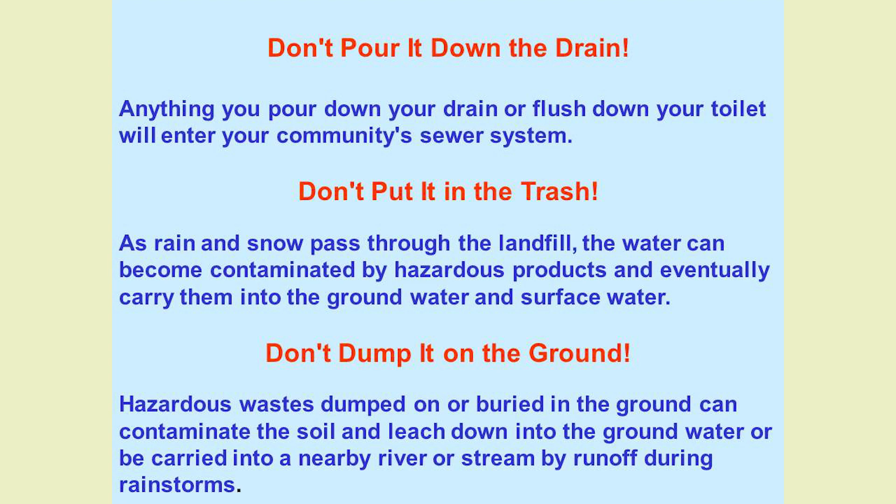So what can we do? We can buy only what we need of these products, try to find less toxic alternatives, give unused portions away to people so they don't have to go out and buy it, bring your stuff to one of our household chemical collections, and basically take responsibility for what we buy. And of course, we never want to pour it down the drain, put it in the trash, or dump it on the ground. Pharmaceuticals, there was a study done across the United States.

I think there were about 25 cities involved, and in Philadelphia, they found 56 drugs in the drinking water, the tap water. This wasn't water testing in a river or a stream, it was actually tap water. So we want to try to dispose of our drugs properly. We used to think that meant flushing it down the toilet, but now we know it does not mean flushing it down the toilet. You can return them to pharmacies, you can crush them up, mix them with things like coffee grounds, and throw them away.

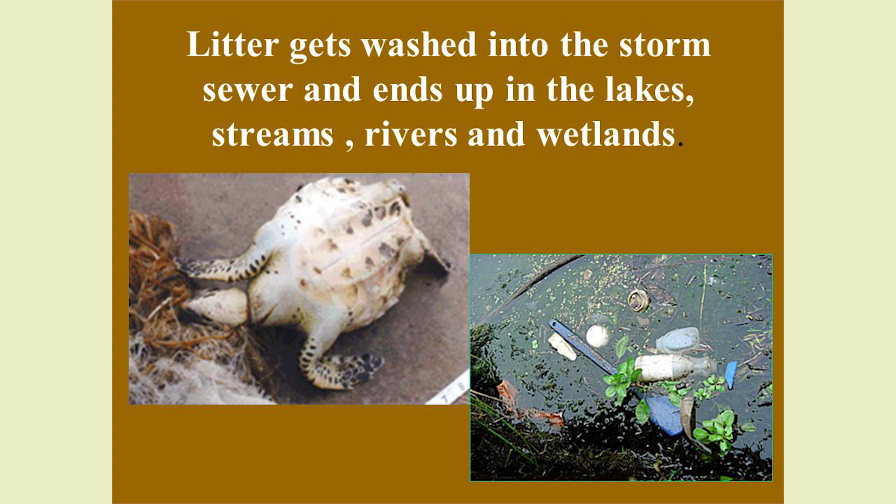But don't flush. And of course, litter, I don't think anyone in here would be a litter bug, but actually most litter is accidental. It's everywhere, all of our rivers and streams. It ends up in our oceans, where we have these five garbage patches now that have been discovered in the oceans. Our garbage goes up to the North Atlantic garbage patch.

So healthy water means we need to have healthy, earth-friendly lawns and gardens, use green cleaning and green personal care products, no littering. We need to recycle, compost, pay attention to our vehicles, pay attention to our pet waste and clean it up and dispose of it properly. Sign up for green energy. That's a great idea, and there's lots of opportunity for that in this area now. Think about things when you're shopping, green consumerism, and think about that on-site absorption that we've been talking about.

And this is one of the ways to do it. A lot of people here have asked me about our rain barrel workshops. That's where we used to teach you how to make a rain barrel. This year we're starting to just give you a very nice ready-made rain barrel. If you come to the workshop, you can go to our website, prc.org, to see when our workshops are. I'm just setting up the fall schedule now. Some of them are on there, not all of them are.

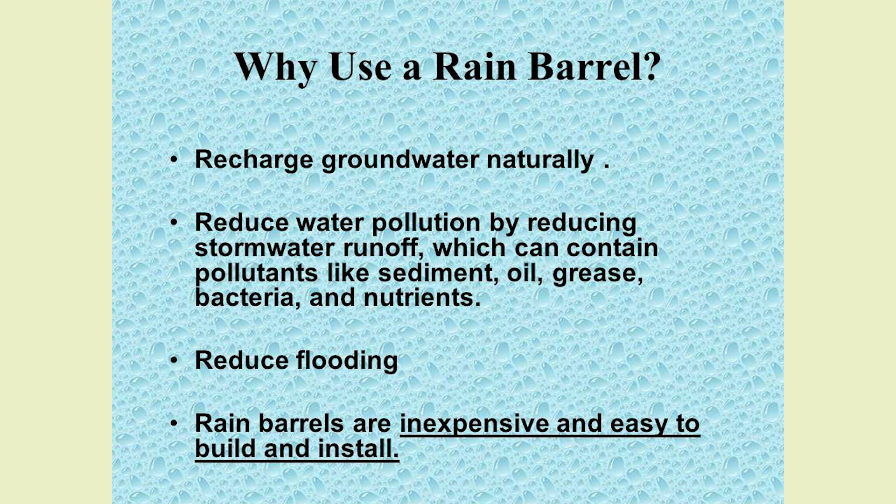But rain barrels recharge the ground naturally. They reduce water pollution because we are reducing stormwater runoff. Same thing, they reduce flooding. They're very inexpensive to make, build, and easy to install. You're conserving water, reducing the chlorine you're using on your lawn and garden, saving money, reducing CSOs, decreasing your impact on the local waterways, and just being a good steward of the local watershed.

Over there you see the rain barrel we used to make up until now, and this is the rain barrel that you now get when you come to our workshops. Both are 55-gallon drums, or 55-gallon capacity. They're super simple to make, but it turns out a lot of people didn't like my 55-gallon drum and the bright blue and the bright green, because that's all I could get. They have to be food grade. And so now we've got this nice barrel, and it's 50% recycled content.

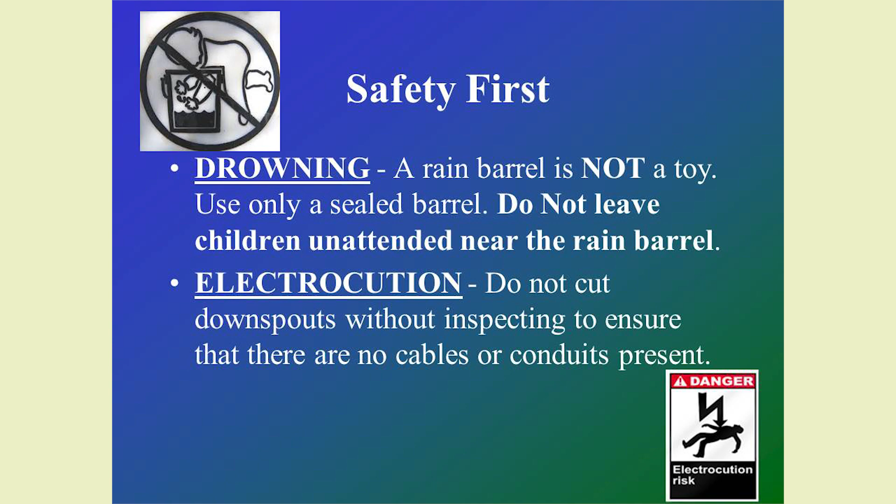Few things about rain barrels. It's not a toy, so you have to think about things like electrocution. When you're hooking it up, you don't want to have it near any kind of cables or conduits. You don't want children playing around it. You don't want anyone, obviously, to take off the top, fall in, and drown. You have to be paying attention.

Tipping hazard, if these things fall over, they weigh a lot. A gallon of water weighs 8.34 pounds, so times 55 is, I don't know, 400 and some pounds. So you have to pay attention when you're installing these that they're very level and very secure, and make sure the ground's super level.

Typically you're going to elevate this because you're using gravity to get the pressure going. So you want to have it level, making sure as you're piling up your cement blocks, maybe too high, that everything's very stable and very level.

This isn't water that you can drink. You don't want to give it to your dog either. It's not for anything other than lawn and garden and groundwater recharge. It's fine to just catch it and release it, letting it get back into the ground, even if you don't want to use it on plants.

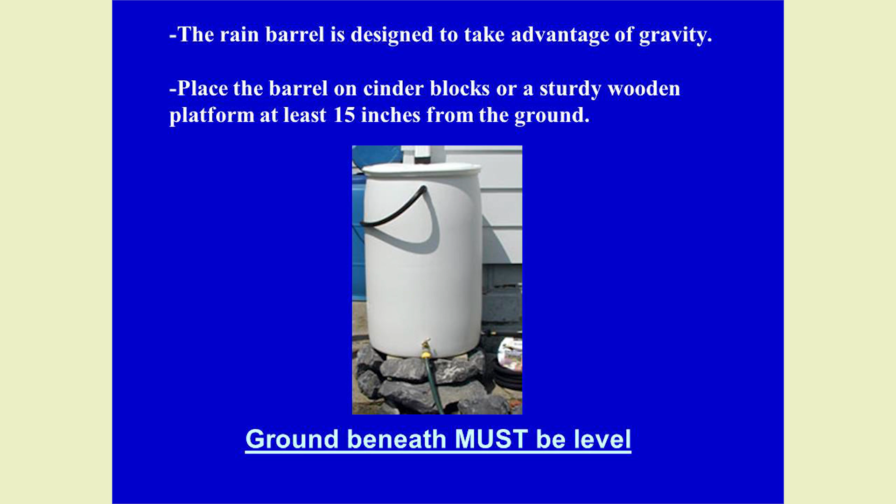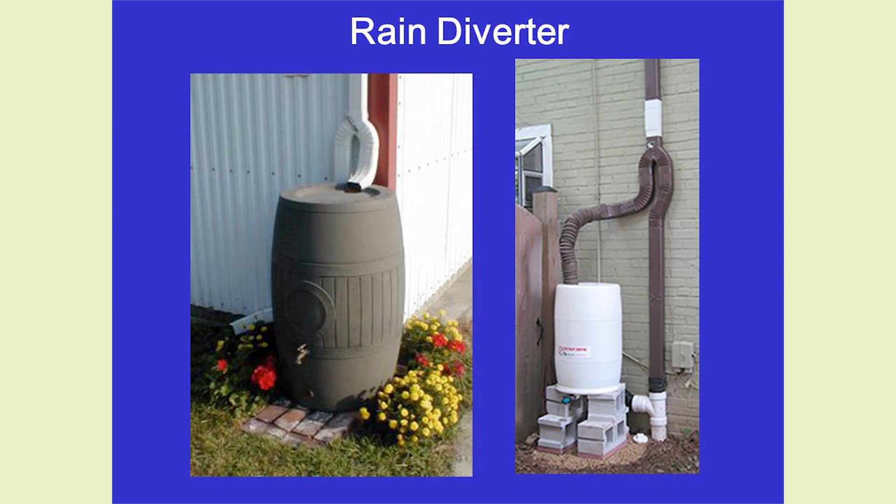Again, we need to make sure it's level, and we want to elevate it because we're using gravity to get that pressure going. They also have these things called diverters that you can find online. That means once the barrel's full, you can make the water go elsewhere, either into an absorbent area on site or back into the system, which is okay if you live in a place with a separate system for stormwater and sewage. But if you live in an area with a combined system, it really doesn't make much sense to put it back into the system. So it's best to run your overflow off into an absorbent area.

Basically, you're going to take the square footage of the house. It doesn't have anything to do with the size of the roof or the pitch of the roof, just what the roof's covering. So you take the square footage of the house times 0.6 times 40 inches, which I thought was the annual rainfall, but then I saw on another slide it's like 36 to 38, so it's something. But anyhow, that's the calculation, and you can see that a house with just a 1,000 square foot base would provide 24,000 gallons a year.

So if a whole neighborhood did this, we're talking about getting millions of gallons of water out of the combined sewer system.

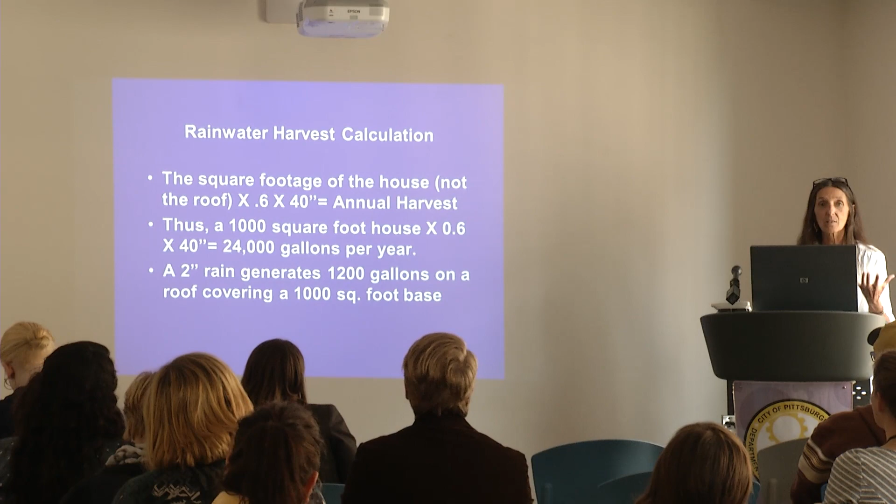So you don't want to use your water from a rain barrel to water a vegetable garden unless you have the right kind of roof. If you've got wooden shingles or shakes that have been treated with chemicals to resist rotting and moss growth, a zinc anti-moss strip, copper roof or copper gutters, asphalt shingles that are zinc embedded - all of that renders your water not suitable for an edible garden. So that is something that I hate to say, but feel like I have to.

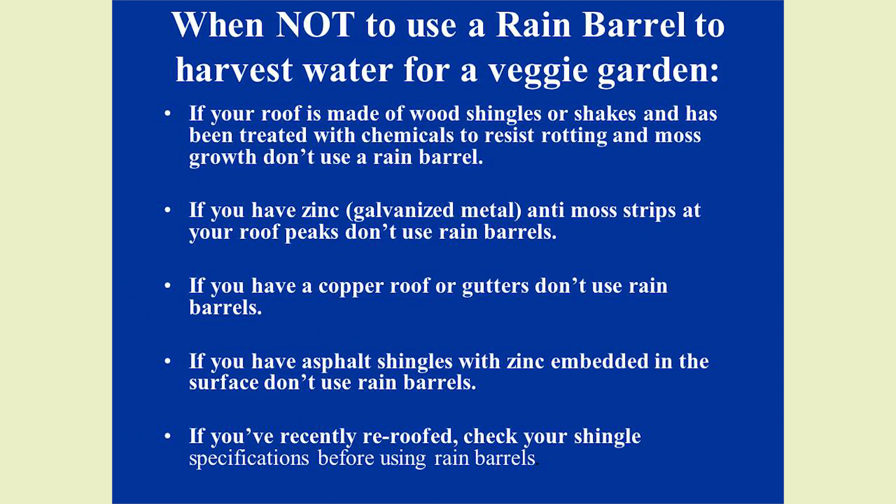But it's still great to do it, and on-site absorption, once again, just recharging the groundwater is extremely valuable. Some other options - all of these have already been mentioned, but we'll fly through the residential application of these. Rain gardens also help to reduce flooding by absorbing rainwater and stormwater runoff. Vegetation can remove up to 99% of toxins from water, so they're great at cleaning water.

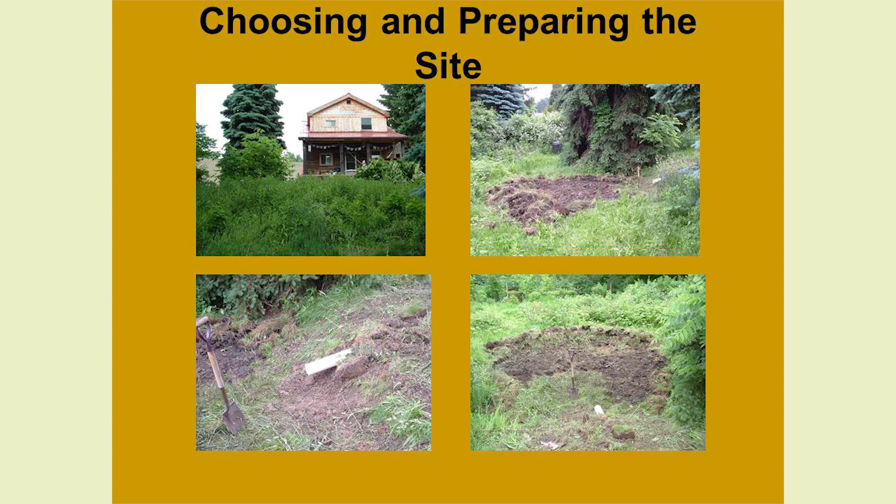This is putting one in a yard, so you can see the water just comes from the house, down the hill, out the pipe. Then we covered that pipe with rock so it could disperse more evenly, and planted native plants. All there is to it. It's not difficult. And it's about 20% the size of the area draining into it, roughly.

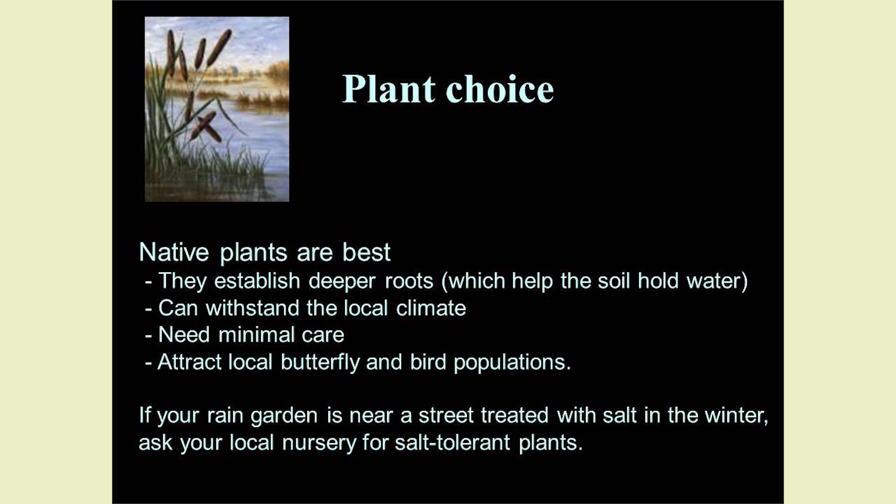We want, of course, to use natives because they're the easiest to take care of in this area. They are best in our climate, need minimal care, attract our local butterfly and bird populations, and just work best.

We've also talked about swales, and that's kind of like a ditch, a trench. It could be shallow, it could be deep. You put it in on contour with the land, and it catches water as it's running down a slope. And you tend to then find vegetation because, of course, there's a lot of water.

But as these trees grow, they're going to be using more water, intercepting more. And also the leaves on trees intercept rain before it hits the ground, which helps to prevent evaporation and erosion. And of course the roots absorb lots of water and prevent sediment and runoff.

And if you don't have any place to plant trees, and this has already been mentioned as well, planters. We can grow things in planters, and those will also absorb a lot of water in our landscape.

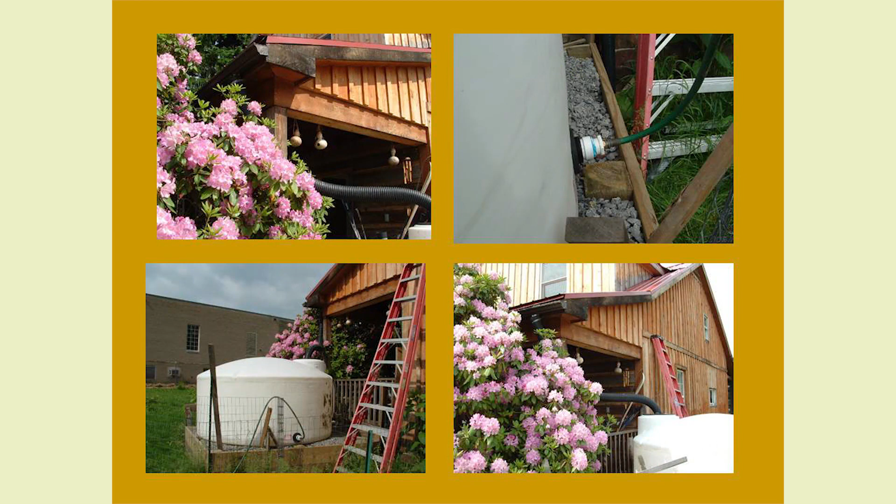And above ground cisterns have also been mentioned. This happens to be out at my house. That's an 1,150 gallon above ground cistern. And the overflow from that goes into the rain garden. So, any questions?